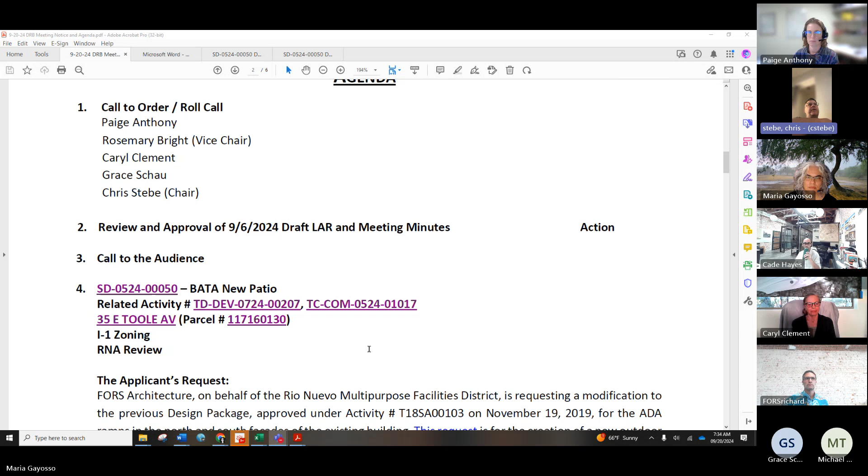Review and approval of last meeting. Get a motion on that. I think Caryl's trying to make a motion. You're on mute.

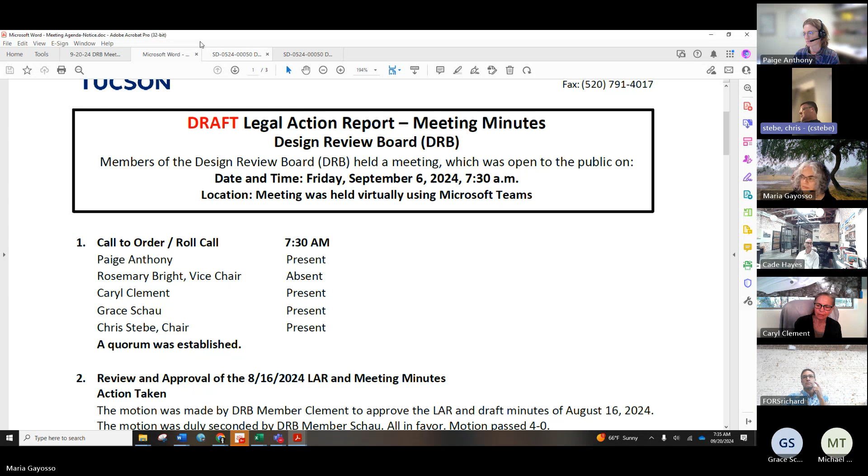Sorry, I would like to make a motion to approve the LAR and draft minutes of September 6th, 2024. I'll second that motion, seconded by Paige. All those in favor? Aye. Raise your hand. Aye. Any oppositions? Hearing none, Maria, sounds like we have that approved.

I'll do my normal call to the audience. Is there anyone on this call currently that isn't associated with the city, with this review, or depending on the agenda today, that would like to have a couple minutes to address the board? Hearing none, item number 4.

Let's get this case rolling. Do you have any staff summary? Yes, Mr. Chair, members of the DRB, this is the existing BATA restaurant on Toole Avenue in downtown, and they're coming back with the proposal of expanding their gross floor area to create a new outdoor service area. The applicant is here and we'll let him do the details.

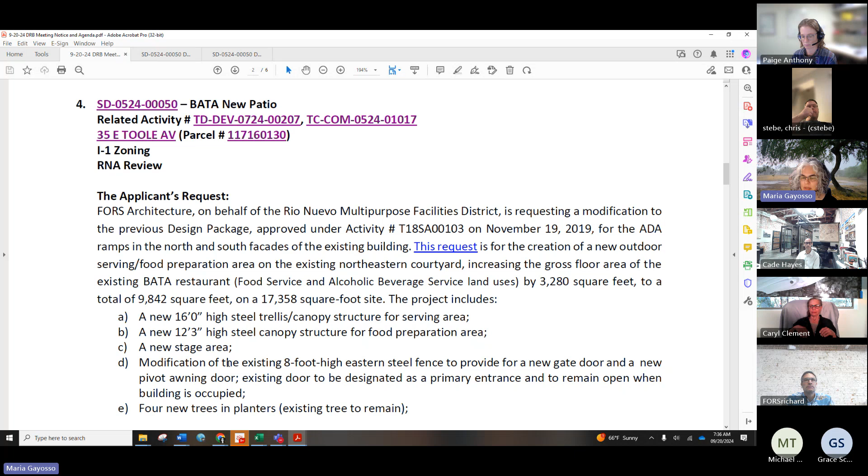I had come to the DRB back in 2019, I believe, for the installation of ADA ramps in the front facade on the southern side of the building and also in the rear on the northern side of the building. That was approved, so this is really a modification of the previously approved design package.

This project is a contributor. It contains a contributing structure to the Warehouse National Register Historic District, and these will be reviewed by the PRS. Usually it goes to the PRS first and then goes to you, but the PRS agendas have been so busy. We wanted to help the project move forward, that's why we brought it to the DRB first. And the PRS is going to review this project.

Actually, not next Thursday, they couldn't get quorum. It was just rescheduled to the 25th. That's correct, Michael? 24th. Okay, and that's Tuesday. Okay.

Also, I wanted to let you know the city of Tucson has lost their historic preservation officer, Jody Brown. She resigned. Oh wow, so quite suddenly. So together with Michael Taku and our supervisor Dan Bursuck, we've been taking over that section in the department, and with the help of consultants.

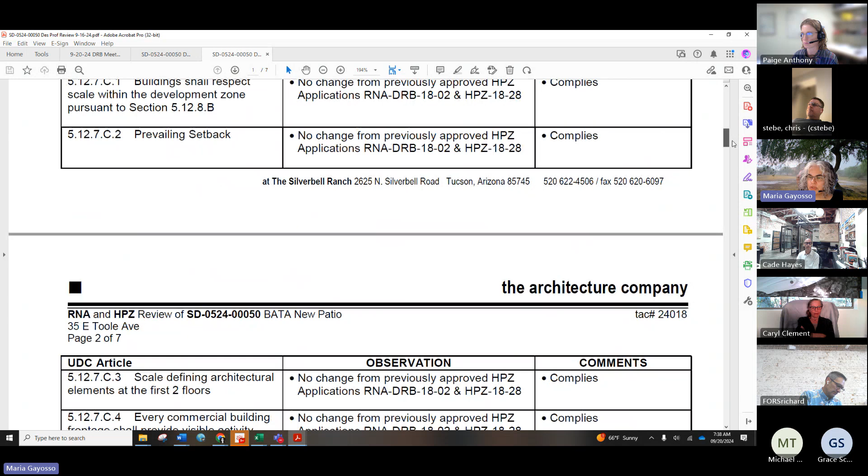So I did reach out to one of our design professionals, Richard Fetton, who provided some initial review for this project on behalf of the Historic Preservation Officer. He just had a couple of comments, and I'm going to share them with you because I just got his review as well, just for your benefit.

He was okay with everything. He was just asking to submit, for the applicant to submit details or cut sheets of all proposed lighting to confirm that all outdoor lighting complies with the RNA section in the UDC.

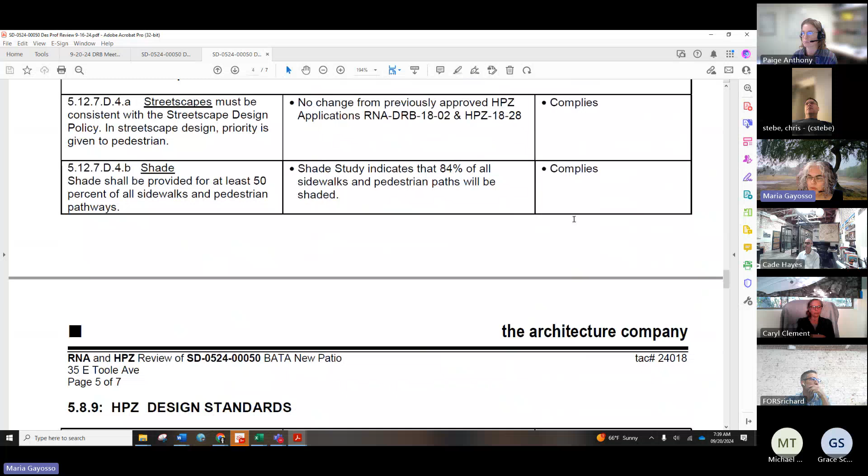The other comment that he had, let me go back to that. He wanted also details on the fence. Okay.

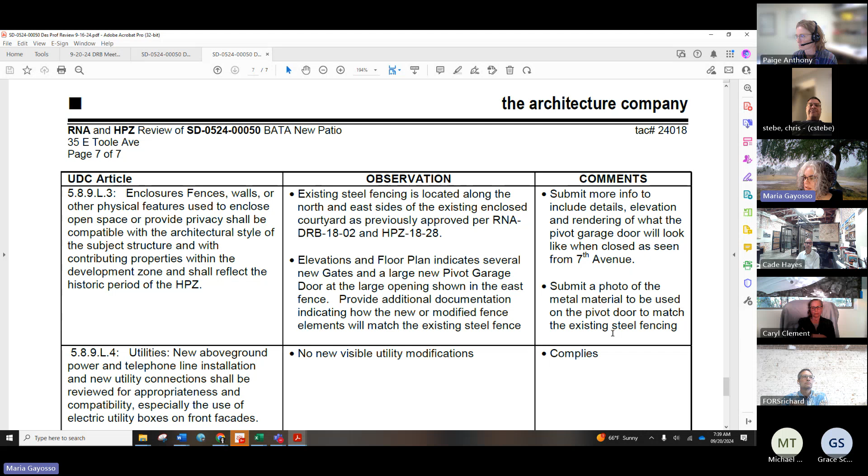He was requesting the applicant to include details, elevations, and renderings of what the pivot garage door will look like when closed, as seen from 7th Avenue. Submit a photo of the metal material to be used on the pivot door to match the existing steel fencing. And those were all his comments. Besides that, he was fine with everything else and is recommending also that the PDSD director approves the project. And that's all I have.

And I want to apologize to Richard with everything that's been happening in the office. I failed to send you the appointment on Microsoft Teams, and I'm glad you were able to see it and join in. Yeah, thanks, Maria.

I was waiting for it, and then I signed on yesterday. I'm looking, and then I had to double check when I saw 7:30. I was like, well, does she mean 7:30 p.m.? I've never had a DRB this early before. So I apologize also, everybody. I'm not a morning person, so if I stumble my way through this, I literally just woke up because I worked late last night. So I'll do my best. Maybe it'll go smoother, I'll be calmer.

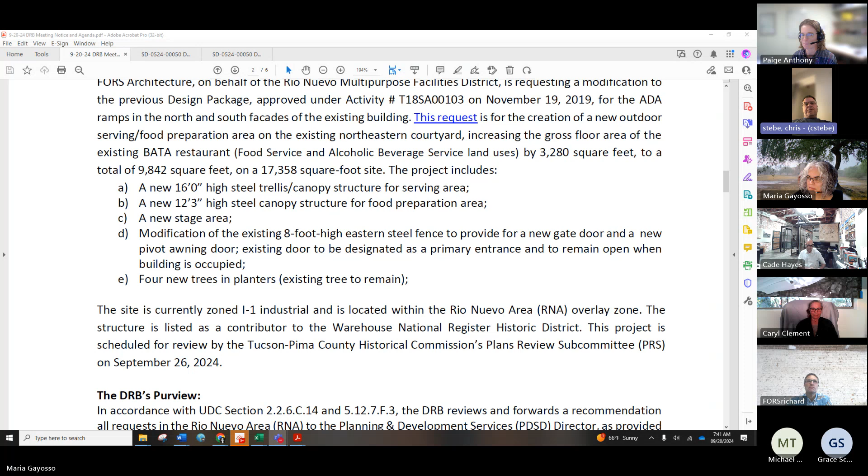Give us a quick overview of what you guys are doing over there. If you have any plans or elevations, we have a list of about 14 or 15 items that we're going to run through and see where you land on that. If you've looked at that list, you kind of know where we're going to be looking and what kind of things are under our purview. But give us a quick overview of what you guys are doing back there.

And sure, Richard, you can share your screen. Yes, please. Okay, I'm going to go ahead and share my screen with you guys.

Basically what I did is I just pulled out what I thought were the more relevant pages of the hard copy submittal, so I could give a little clarification. Maria already covered, stole some of my thunder on the historic stuff, so that's good, and I'll kind of gloss over that and go a little bit quicker. I'm going to go ahead and share my screen right now with you guys, and you should be seeing it.

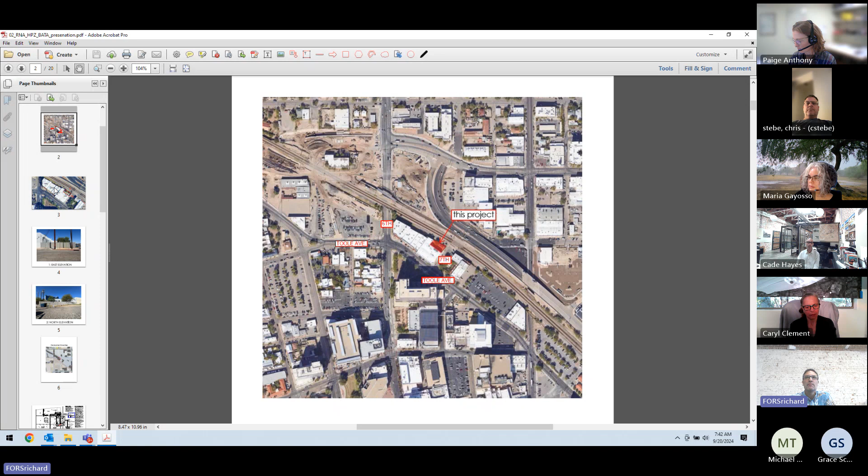This first slide is just a Google view of the larger context of the area, just to give some context. So we're looking at this block here. This is Toole Avenue that runs through here, 6th Avenue, 7th Avenue which has been discontinued, and just to the north is the Links project, 5th Avenue, and here's where the big dig is going on. We are in the back part of that. I'm going to zoom into this, a more recent street view.

The original one was from the presentation; this is a more recent one. So again, this is the existing Bata restaurant, kind of an L-shaped building. The restaurant is in this area, and this area in the back is where this project is taking place. There, I have it kind of demarked in red.

Right now it is just a steel-fenced-in utility yard that they use to put old chairs, banquettes, tables. It's just kind of a storage yard for them, really.

What we want to do - well, let me give you a little more context again: Toole, 7th, North Stone. These arrows that I have drawn on here are some exterior photos. The last time I tried to use Google Street View in one of these meetings it didn't go so well, so I went ahead and captured some photographs to depict the area.

So standing here looking toward the west, it basically looks like this: an 8-foot high steel, sort of extruded steel deck fence, kind of fading a little in paint. This is the Bata restaurant building you can see in the background for context. And if we were to stand out here on the railroad tracks looking toward the south, similar view, the same fence kind of wraps around and encloses this whole area.

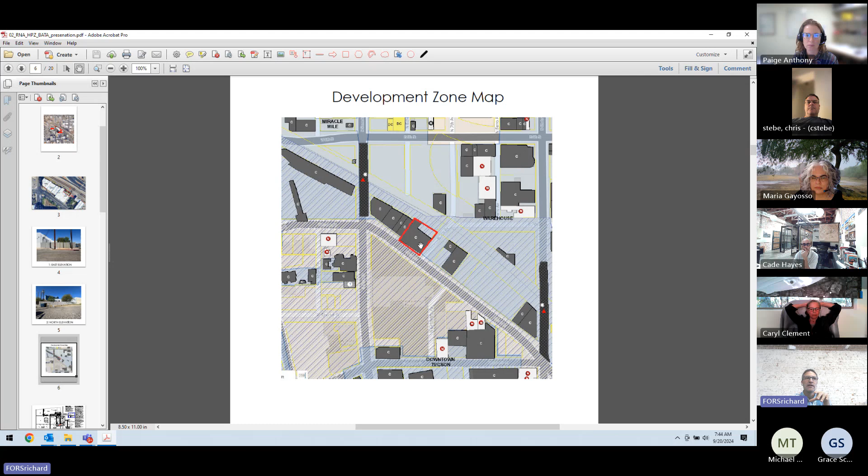Jumping down, quickly - this is the development zone map. As Maria mentioned, this is contributing. You can see our little slice to the back is technically, I guess, not historic, but the building is, and we're adjacent to the building. Also, as Maria mentioned, this is the previous 2019 RNA HPZ.

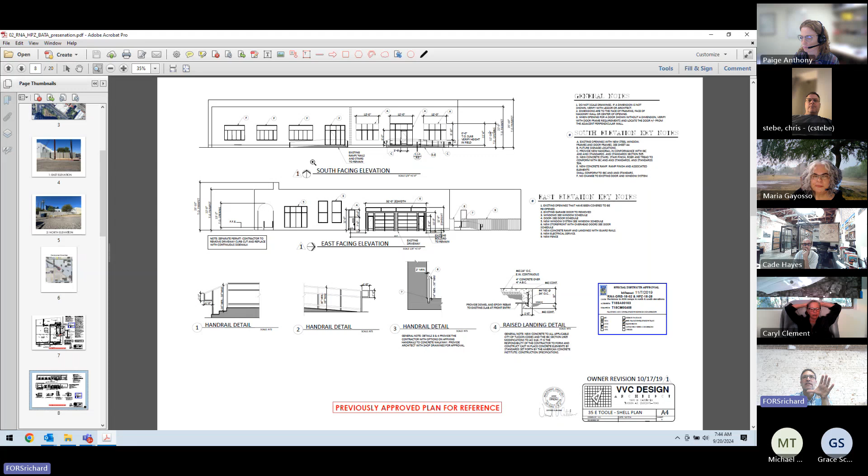That was primarily for - you can see there's some ramps out front, some ramps in the back. If I pan down to the elevations, there also was a little bit of work, Maria, that was included where they put these roll-up garage doors in, so technically the building was slightly modernized from its original historic appearance.

I'm going to zoom in again - this is the previously approved RNA. This area in the back, as Maria mentioned, was to put these handicap ramps in because the Bata restaurant is about 2.5 feet higher than the existing grade. So these ramps were put in to provide egress out of the space, and the rest of this area is just the utility yard.

So we want to activate the space as a part of the restaurant, turning it into what we're calling Bata Garden - it's kind of like a beer garden.

So we want to add 2 covered structures. This one in the front will actually be a solid steel deck that we want to have an outdoor grilling station, so we have some food service equipment out here. We want to have an outdoor bar. We want to have outdoor grilling. And then the rest of the space would be seating.

And you can see we have another structure in the back that would be like a trellis-type structure. Then we want to add plantings and tables and chairs, and again activate this space as a patio that would be serving the restaurant.

So I'm going to pull back out again now to the more site plan view of my drawing and zoom in here so that you can get a better idea. I wanted to show you graphically what those looked like, but then in plan again, this is our patio space.

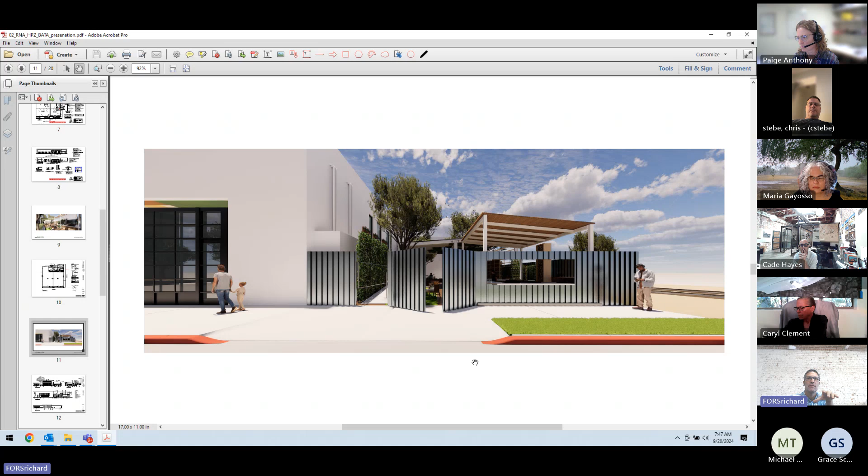And again, looking at this structure, I'm going to jump over next to a more static construction drawing, because part of the reason we're here for you guys is because of the concept that from the street, would you see the work that we're doing? And the answer is yes, right?

So looking at the construction drawing, here's the 8-foot fence. In the background here, you can see the back of the Bata building, which is at 20 feet tall. The fence is at 8 feet tall, and then you can see our structures. One of them tops out at 16, the other one at 12'-3". So the idea is that these structures are above the fence, below the existing building - we put them in there in what we thought was a nice setting, but yes, you will see them from the street.

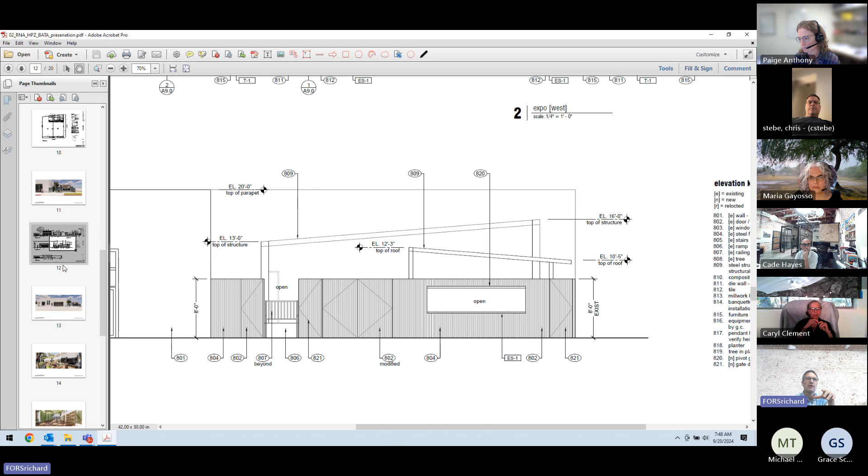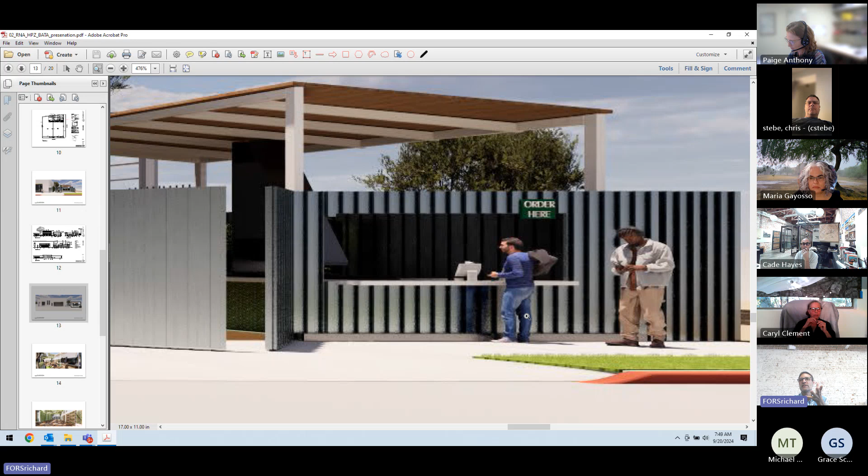And again, that's the primary reason that we're here for this DRB. Pulling back a little bit further from the rendering I showed you before, just a little more context - again, the building, the fence, and then you can start to see our structures into the back there. And then this idea over here that we need to elaborate on, that you could potentially order from the counter and kind of engage the street a little bit.

I'll skip back to the plan view. Here's our approach to landscaping. There's an existing large mesquite tree here that we want to keep, and then we want to add some trees of our own, smaller potted trees and some larger trees, just to create the feel you were looking at earlier. We have this existing mesquite, and these trees would be Chinese pistache. We have some vines and other things just to green this space up a little bit. You can see this in plan now. Here's the kitchen area we're talking about, with access to the street. We have a smoker in here and an outdoor pizza oven that would let us make the small outdoor menu they want to propose here.

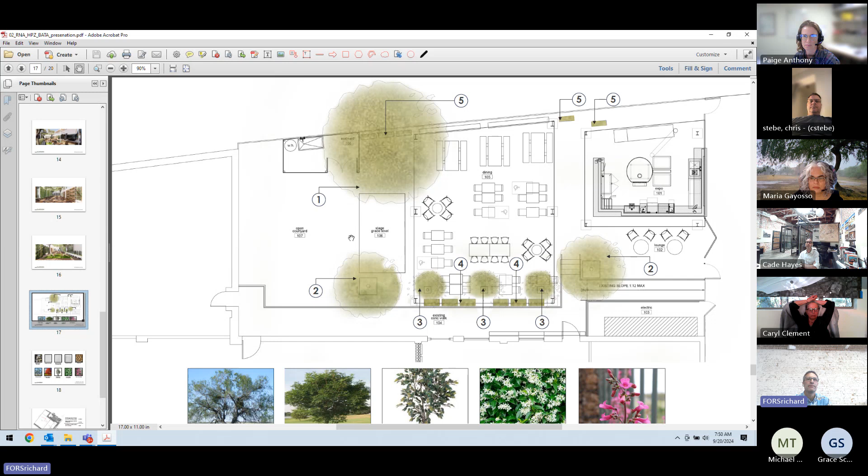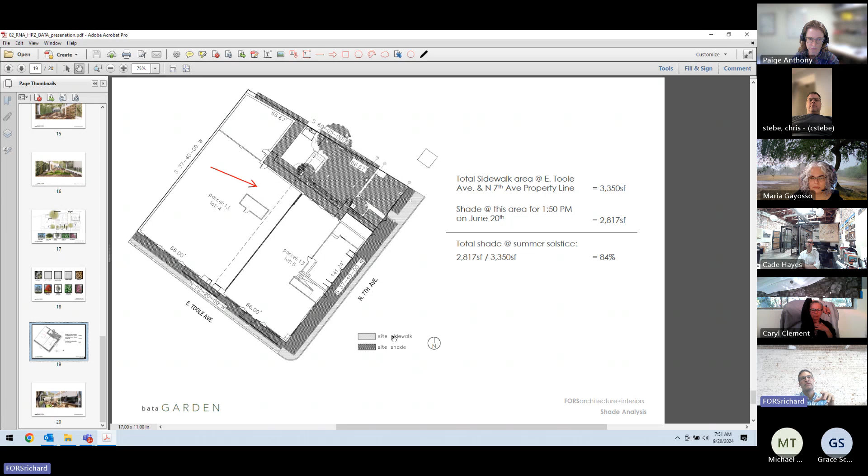Lastly, one of the items that's important to you guys is shade. This is a shade study at the highest sun time of the year, and most of this area is in shade. At the end of the day, all the trees, all the trellises, and the building create vastly, about 84% shade compared to the sidewalk.

So that's just a quick rundown of what we want to do, zooming back again to the money shot of what we want to sell here. Again, just reactivating this space as more of what we think this zone is asking for and what the restaurant wants. So I'm going to turn it over to some questions if you guys have any. I know I spoke a little fast, so hopefully not too fast.

How much espresso have you had this morning? That's just it, I have a 4-shot iced latte to wake me up. Thank you. See, I'd hate to have a presentation after you've had coffee.

Yeah, that was good. Paige, it sounds like you have something you want to jump into, so I'll let you guys have it. It was a good presentation there, Richard. You gave us, thank you. I think most of the info we want to go after in this review. So take it away, Paige.

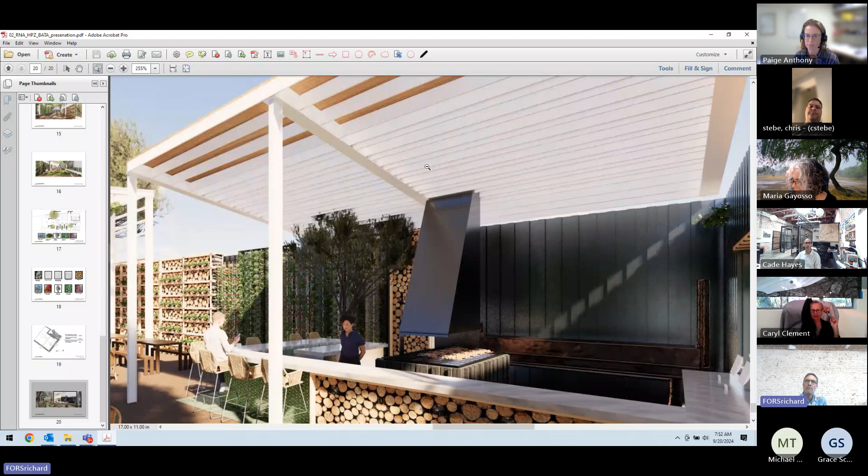I have some questions about the roof, the trellis and the roof. Is that going to be... I'm having a hard time telling. Is one of them going to be open and the other one solid? Exactly. So the area where you eat is meant to be more shade, and we want to grow this vine over it. The area where the kitchen is, is solid, and that's where I showed that metal deck. It's hard to see there, it looks like wood poking up, but it would be a metal deck. We needed this primarily to cover the kitchen area already.

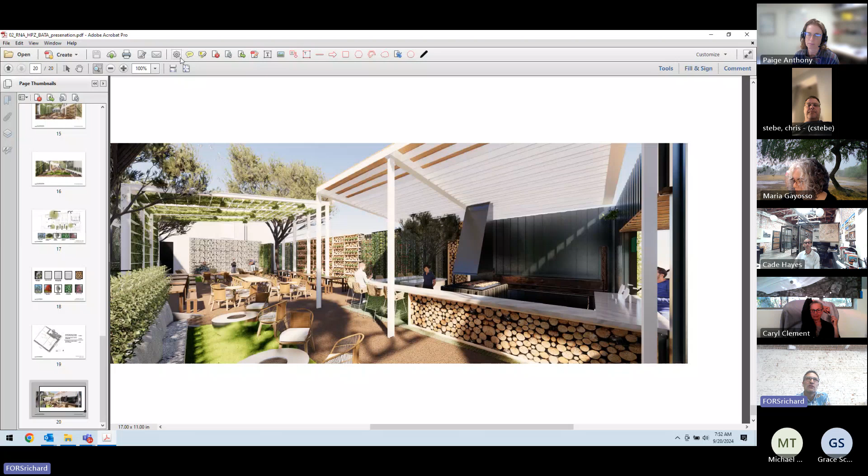To get this approved by the health department has taken a lot of negotiation to get them to allow us to cook outside, and we need to provide as much protection as we can.

I was wondering if you were aware that the Chinese pistache is not really a good container tree because the minimum size is really 25 by 20. As a landscape designer, I don't see how that tree is going to do well in a container in the long term, especially being rather close to the building. Was there a reason for the container versus an in-ground planting?

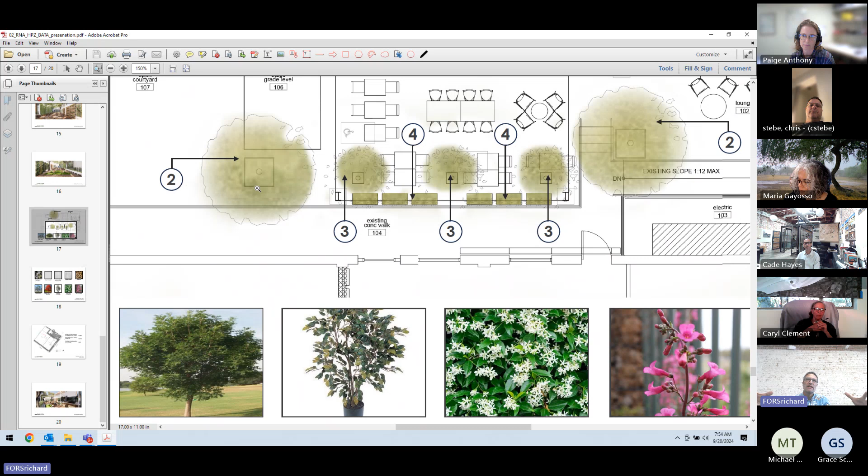I guess I'd say there were some smaller container trees, some smaller containers. These smaller ones were in a container, and these were what we kind of want to use, ficus trees. These are kind of small, we like the look of these. When I say these were in a container, these are actually going to be an in-ground tree with a planter box to just kind of build it up, but the idea is that it would be an in-ground tree.

This is just a tree we have used before. We recently did the Corbett's pickleball project, using this tree there to create a kind of bosque area, and we liked it for its largely evergreen properties, though it can get red in the fall a little bit. We put it here as a placeholder, but it's a good idea to reconsider since you're right, it is a little close to the building. This landscaping wasn't really regulatory, it was more for our own look, so we were just trying to choose what we thought would make the place look good, and we wouldn't be against pivoting. It's a good tip that we should look for something maybe more appropriate for scale, even if it is going to be in-ground.

So I'm going to make some notes about that.

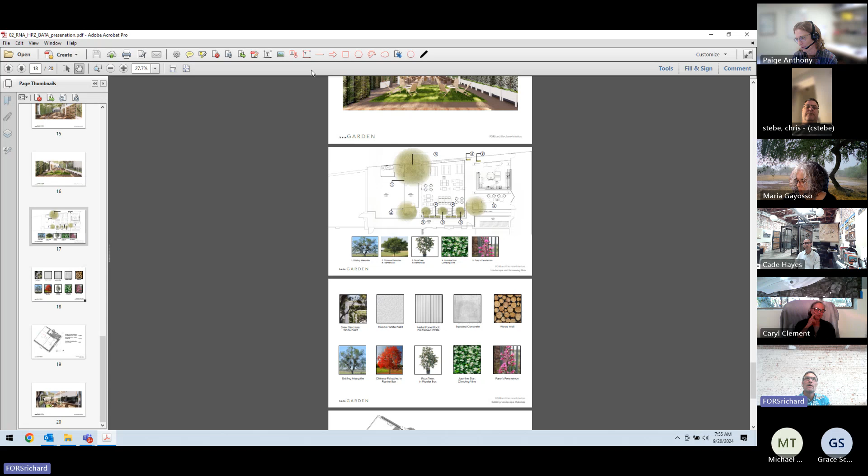How big are the planters? Right now they are 4 foot by 4 foot. The idea would be that it's a 4 by 4 foot planter where the bottom is open, so the roots could potentially go down. It's really just an enclosure because we wanted to get some kind of vertical effect, for the look of it, so that it didn't just look like a tree, it looked kind of like a curated approach.

We would be happy to put other types of plants in here. We have the mesquite back here, and there's a lot of mesquites and palo verde that gets used. We were just looking for something that was a little more dense green, so any suggestions we'd be happy to entertain.

The Texas olive might be more appropriate in size. I'm concerned, even though I'm not sure what the ground surfacing is in that area, but I understand the roots can go down - if they're not going to get water beyond the planter, it's not going to really help much. That's all I've got.

I know we have a list to go through, but let's see if anyone else has comments or questions.

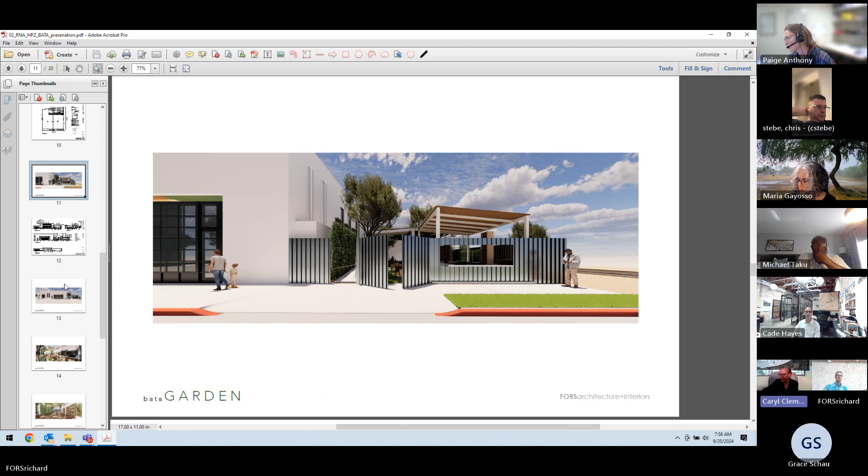Yes, okay, with access to the outdoor patio area, the handicap access would be through the gates, the folding doors, or whatever you call them. What is the handicap access into the outdoor area?

So what's happening right now is that there is accessible access. There's stairs, and then there's this access for egress, and also to get up into the rest of the restaurant. At this point, without building any more ramps, the idea is that we would be utilizing this existing ramp for accessible access into the building, as you proposed.

The idea was that while the business is operating, these doors in this area here - this is not such a great site diagram, I apologize because the property line is so strong - but the idea is that while the restaurant is open, these doors are open.

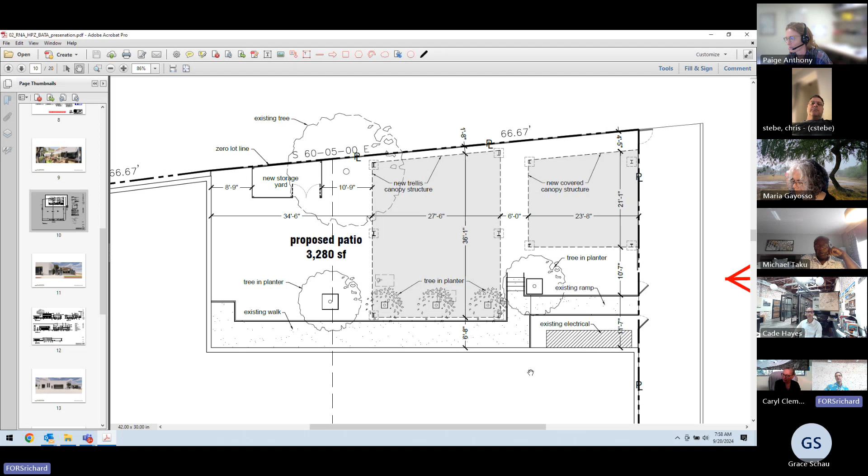So this whole area right here is completely open, and people would have to go out into the right of way and come back up and on. We just didn't really want to build any more ramping back here. The area is small, and it seemed like that was okay, so we proposed this during city review, and the building official was amenable to it.

That answers that question. My other question then is, when the doors are open into the patio area, are they going to impede traffic flow into the existing sidewalk area? You're talking about this area over here?

Yes. So when the doors are closed, part of the door has some smaller man doors that we needed for egress, and you can see one down here. The idea is that this door would operate with panic hardware, and then this one up to the north as well. They're not really showing up so well in the rendering, but it's kind of over in this area here. I'm just going to zoom over here again.

Yeah, these would all be panic doors, smaller doors that people would be able to egress the space from. To kind of go back to this plan, this was a little bit of the floor plan. Go back to this guy again.

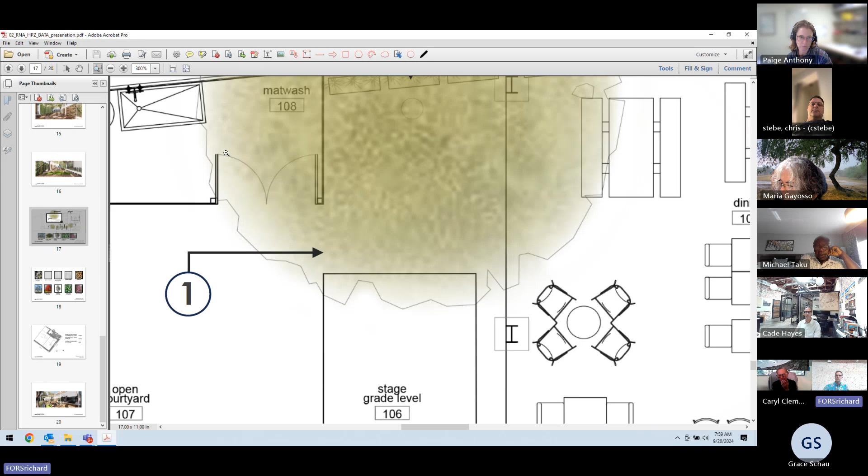In your presentation, I understood that those folding doors would be open all the time, but are they not? No, they are going to be closed for security at night- well, they're open all the time when the restaurant is in service. But at night, when they close it down, this door here would close to secure the place.

So when they're open, when the restaurant is open, will they impede the flow of traffic on the sidewalk? Yeah, so this is a little bit confusing. Right now this shows- if this door was open, I see what you're saying, this would end up being like this, and it would impose, unless it folds all the way back like this.

At this point in time, we definitely don't want this to be in. It's possible that they could swing in. The idea is that they fold all the way back, or they could be more diagrammatic. We show this as one big door, but in reality it's probably going to be smaller doors, and the idea is that we don't want to impede traffic.

No, this is also a really wide sidewalk. It's like 10 to 12 feet. So we think we've got the room, but yes, we don't want to impede the traffic regardless. That's the idea, that we would not impede the traffic. Okay, thank you.

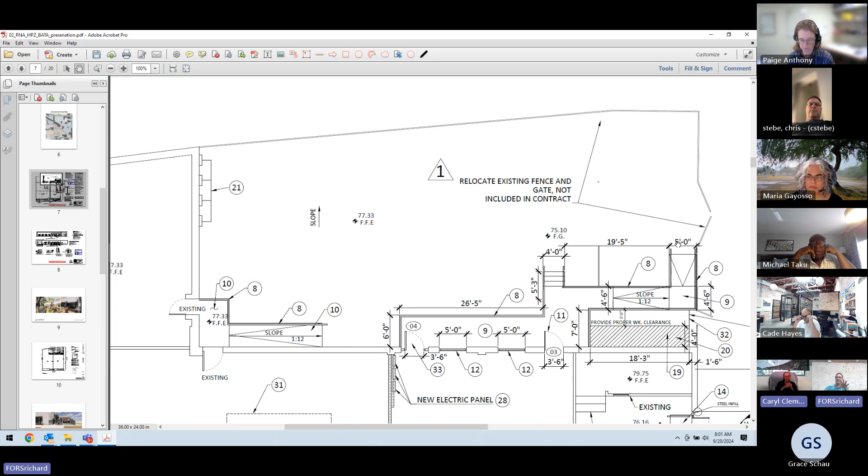Well, I touched really briefly upon that, but let me jump back to the approved one. This original approved drawing- there were a lot of liberties taken with the actual construction of this project. This project was built during COVID, and it does not match the existing plans that you guys have. You can see that the way the accessible ramps work is not what's there right now. It showed a kind of dogleg ramp, then discontinuous, and then another ramp down here. But what was actually constructed was what we're looking at in my drawing, where this is what it looks like.

This entire area is raised. There's a stair here and a ramp, a single ramp in this direction. This was what was actually constructed and approved somehow in the field, even though it doesn't match the drawing. So this is what you were really looking at.

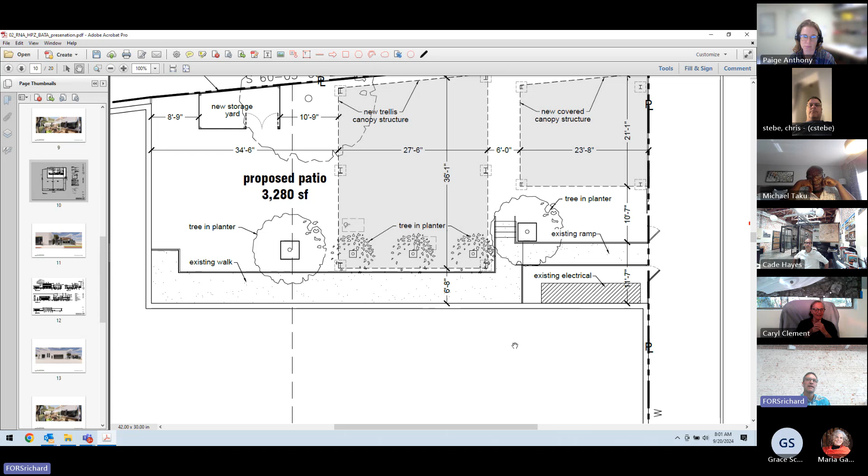Okay, and then the other item that I kind of lost in the renderings is the stage. Can you talk a little bit more about how that works? So the renderings were conceptual, and the idea would be that in this area here we could possibly have entertainment. This is just an open courtyard area that's meant to be a flex space that people could do whatever they want.

We don't really have a stage, per se, a raised stage or any kind of thing like that planned. But the idea is a lot of restaurants do have outdoor music. This isn't going to be any kind of an entertainment venue, but we wouldn't hate the idea that somebody with a guitar could maybe sing a few songs once in a while. This seems to have been a component of other outdoor areas that we've done, so we wanted to provide a provision that it could happen conceptually.

Okay, I guess the raisedness and how it correlates with the ramp and the existing walkway is kind of where I was going with that. So it's flat, not raised. Early on we had proposed it during the building review and so many accessible questions came up on how we had to ramp it and all kinds of things. So we just removed it because it was too much to have a permanent raised stage in there.

Sounds good. So then the other question, and maybe this goes back to the renderings being conceptual, but we have that existing, I think it's 8-foot fence along the north property line. How tall are those proposed planting elements on the inside? This looks like a green wall or something.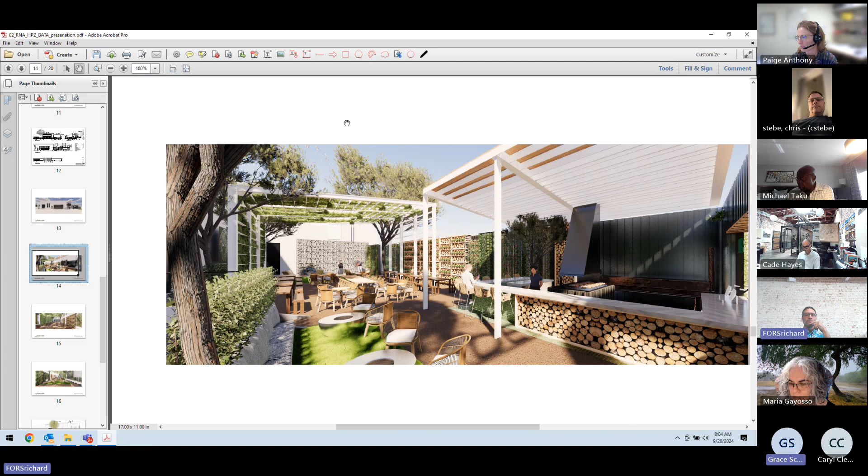But not higher than the fence, I should say. Yeah, gotcha, okay. Where are you guys in the process for review when it comes to Caryl's questions regarding the right of way and TRE or something that you may need to get there? So it has been a very exhaustive process that we've been running concurrent to this process to obtain the building department's review.

We've had four. We went through four building department reviews before obtaining final approval. And I'll just kind of cue you guys into some of the challenges.

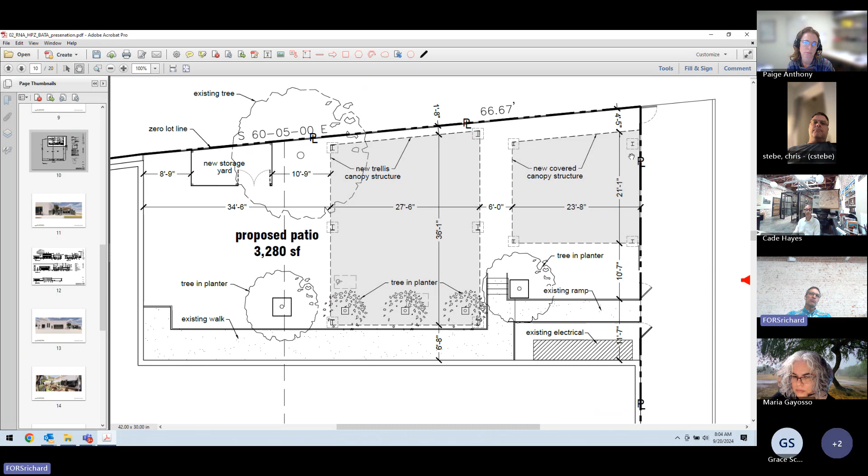So one of them was that these structures are right on the property line. Even though the rest of the building is indeed also on the property line with a zero setback on the intercity lot line, this new area would potentially be upheld to setbacks that we've had to work through with zoning, which ultimately becomes a part of this approval that you guys are looking at. Oftentimes these intercity projects would indeed enable us to build on the property line, so that's one of the things we've had to work through.

So at the end of the day, we've gone through those. Caryl mentioned exiting situations to maintain proper safety exiting and accessibility to the interior, again how to utilize this existing ramp. So we have building approval from a constructability standpoint. We've also had to submit a development plan because this was a change of use, which we didn't realize this yard wasn't the same use, but it wasn't. So we had a development plan that has gone through one review.

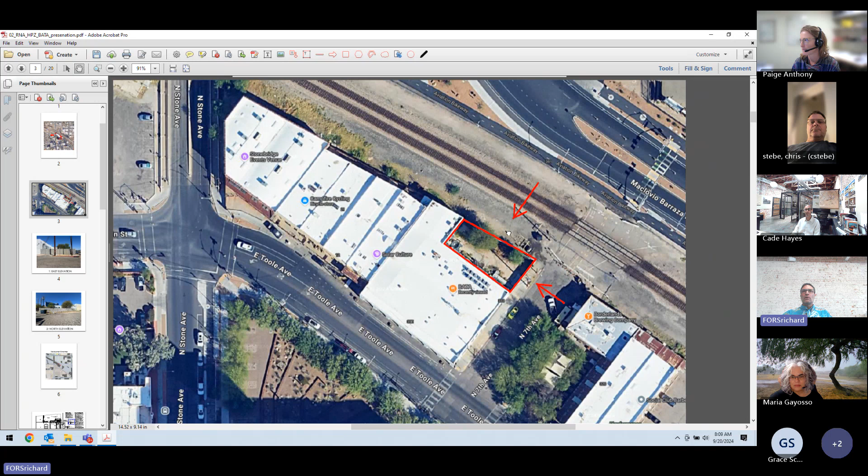I'm not sure if this is a question for you necessarily, but do you know - I believe they're making a connection to the aviation bikeway through there. Is that right? That's something I don't know. We worked on the Corbett's project, which was right across the street, and I had looked at this bikeway on both sides for a long time, but I don't really know what's happening here. You're saying you think there might be something across these railroad tracks to get us from here to there? Yeah, but don't quote me.

I'm not the expert, I heard that too, Grace, but I can't recall. It'd be nice though. From who? It was from me, Paige. Yes, you were the one.

When we were working on those Toole Avenue concepts, we got the Barraza Aviation final approved plans, and those show the vehicle traffic on 7th being terminated, with pedestrian and bike only crossing the tracks onto 7th Avenue - I can't remember if it's signalized, I think it's just pedestrian signals. So it's a small crossing, kind of like they have those ones in Flagstaff on the sidewalks. But we'll see how that actually develops if it ever gets built. Dealing with the railroads is usually a multi-year process. But yes, the plans I've seen that were approved for Barraza roadway improvements show that condition.

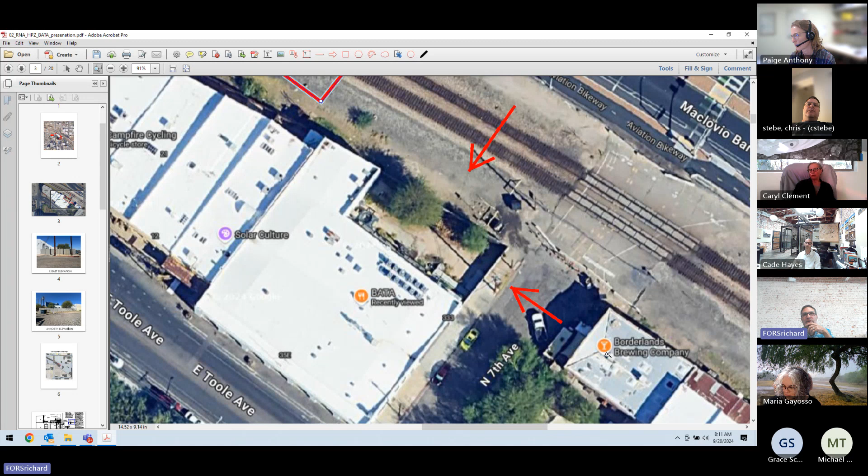I have a couple questions for you, Richard. Just to clarify, the existing fence and fencing material that currently encloses this courtyard are proposed to remain and just be modified and repainted, I heard you say? Yeah, that's the idea. You can kind of see a little bit here - the fence and its kind of massive shadow. At the end of the day, since it's already there, we were just trying to take it and repaint it, and by poking a hole in here and making this a little more accessible, we thought we could turn it into a part of our project.

So that was kind of what we wanted to do, right? Contextually, that area is going to remain very visually similar to what it is now, other than what's happening inside the fence. That's the intent, exactly.

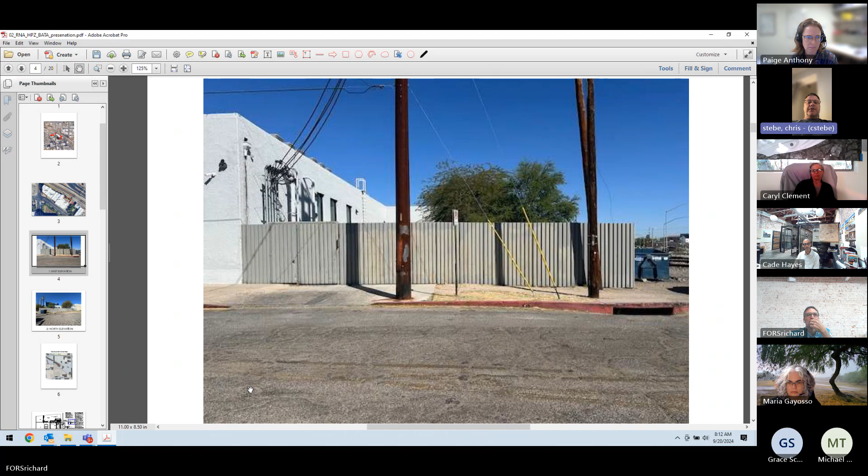Yes, and I think this view is good for the question Caryl was asking about the exit of your access ramp from the building, which terminates into the sidewalk. If you see that, Caryl, the sidewalk's paved all the way to the curb, there's no planting strip. But I have a concern, and this is a great angle for it: that ramp doesn't show a gate or any type of enclosure or closing device on it at all, in any of your renderings or drawings.

So I wonder about security on that, and what the plans are for that piece of the facade and this fencing. If you're on that ramp coming down, I'm concerned it terminates and doesn't terminate onto a flat landing per code. You would end up coming down this ramp and continuing down a driveway apron to the street. So has that been addressed by city code or city reviewers at all, like requiring curb and sidewalk modifications in this area?

Yeah, I don't have it handy for this presentation, but almost all the time we go into these projects, in my experience, the city asks us to close up abandoned aprons. This was not asked for on this project, but we've included it in our development plan to remove this apron, continue the curb here, and pour back so that this is a level landing. That would be part of our project.

In this street view, it looks like the sidewalk does not continue past here, and we don't right now have any call out to pour that back, but we could. We definitely want to mitigate this area here.

Well, you definitely have to pour out that sidewalk. You're providing a pedestrian walk-up window right in that zone that's dirt now, so I think you guys need to show some sort of surfacing to allow that pedestrian movement, and it needs to allow at least one spot that would be handicapped accessible for that exterior walk-up window, in my opinion.

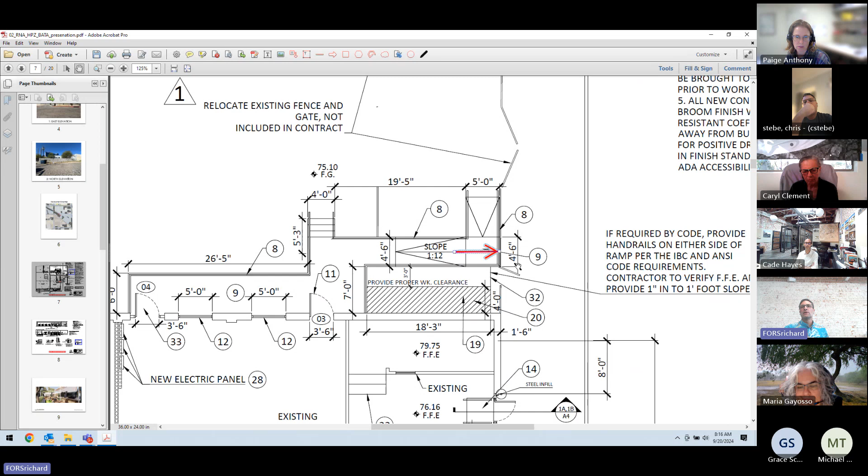So this was a problem that we had during the development review. The original approved plan works great, but because of the way they ended up terminating the ramp right here on the property line, we don't have a landing on our property. That ended up being a problem during building review because we need a landing here.

Aside from this being a level surface, there's no landing onto our property. So at this point in time, I'm going to jump back to this one, which is kind of the best floor plan that I have. At this point, we removed the door because we couldn't provide a landing.

So this was fully approved the way that it was. It's incorrect, right, by code. So we removed that from a security issue, and right now we need to solve this issue because we need to provide security for this place. We're looking at possibly a variance to allow the landing to be on the right of way from the building official. We don't have to, from a code perspective, provide security. We want to, and we need to.

At this point in time, we're talking about putting a door further in or something. We have not, there's not a good solution for that. This is a challenging site. So right now we've shown it as not being there, and we haven't really solved for that exactly, Chris.

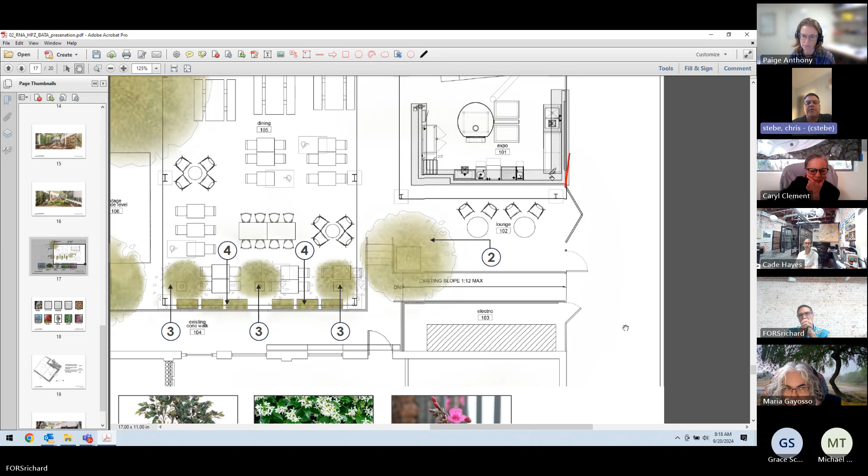Just from looking at tight sites, think of it like a bathroom, put a pocket door on that into the electrical area. Gosh, that's a great idea, actually. We had never even thought about it. Or you could use a double fold, fold it back once for the ramp and then twice to get into electric. Might be a good move for you guys. Yeah, no, I hadn't even thought about that. That's a great solution.

You most definitely need to secure that at that fence line. Just knowing the nighttime activity in this area, you guys are going to have all kinds of problems. I do appreciate the porosity you're trying to achieve in here, but you're gonna have some challenges, I think.

Caryl, did you have any additional comments? You had your hand up for a minute. Yes, I do. Backing up, I think I'm done with my stuff, so I think you can take it, Caryl, if you have anything additional.

Thank you, Chris. Backing up to Paige's concern about the species of the red push pistache. I agree with her, Chinese pistache, either one, sorry. I have thought of three species that are Sonoran Desert natives.

Acacia berlandieri, which is guajillo is the common name, Eysenhardtia orthocarpa, which is kidney wood, and the Lysiloma, what's the genus for Lysiloma, the fern tree? You guys help me out. Well, I thought of those trees. Watsoni? I'm going through my file cabinet in my head there, Caryl. I'll get there in a minute. Acacia berlandieri, Eysenhardtia orthocarpa, and Lysiloma, I can't remember, but it's the fern tree.

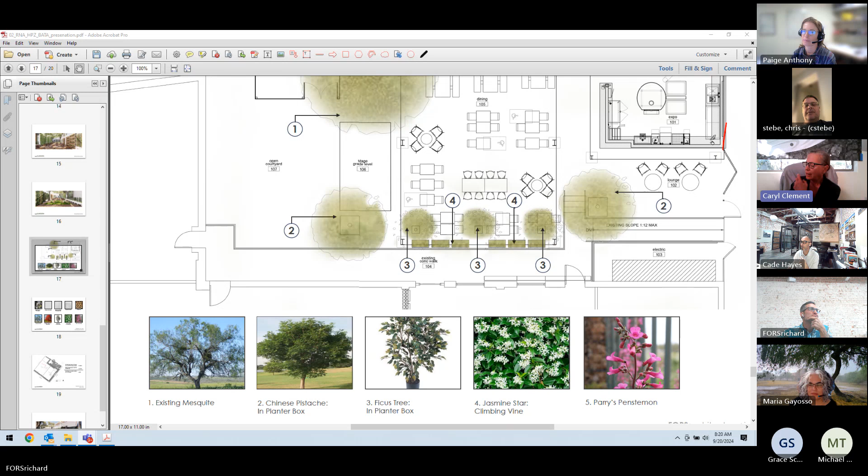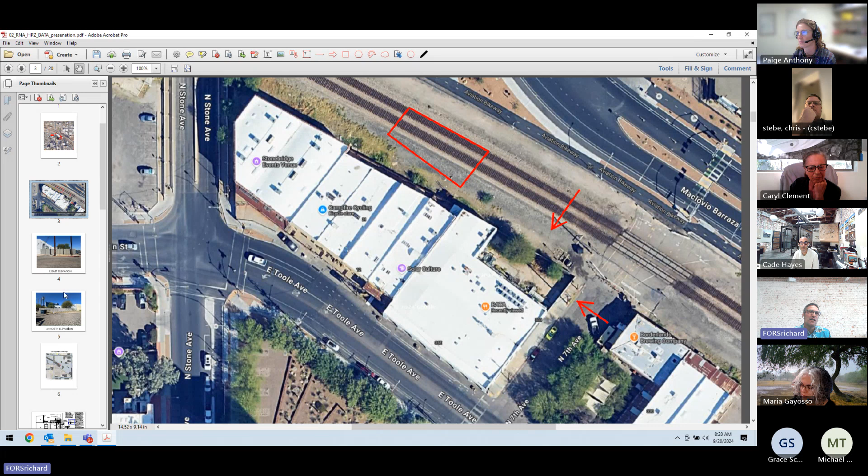Okay, thank you. Talking about the connection to the bike trail, do you have bike parking on your building? Yeah, I'm sorry, I should have stayed where I was. So I don't have the development plan sheet, this went in before the development plan, but we do have bike parking in the development plan.

What we've ended up doing is we have short-term bike parking that we've put in the back of the project just because we have area. And then we have long-term bike parking that's inside this area here via bike racks, for the employees. So we focused all the bike parking in this general area. This is a long way for a person to push a bike in, but it was the most open area that we have. Our development plan depicts the bike parking in these two areas.

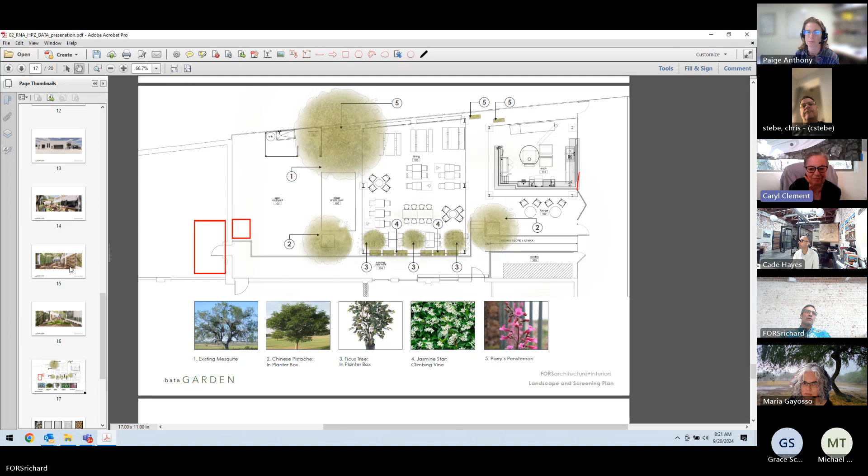Seems a long ways from the bike path. There was existing bike parking out in this area for the restaurant, though I don't remember exactly how much. There's a fair amount. We were required to provide bike parking for just this area, which was only 2 extra spaces, and there's like 4, 5, or 6 over here that we thought would handle the majority of the use for people coming to the restaurant in this area. We thought they'd largely use this area, which is right off the street and seemed like a natural place for biking, which was the original restaurant's provision in their development plan.

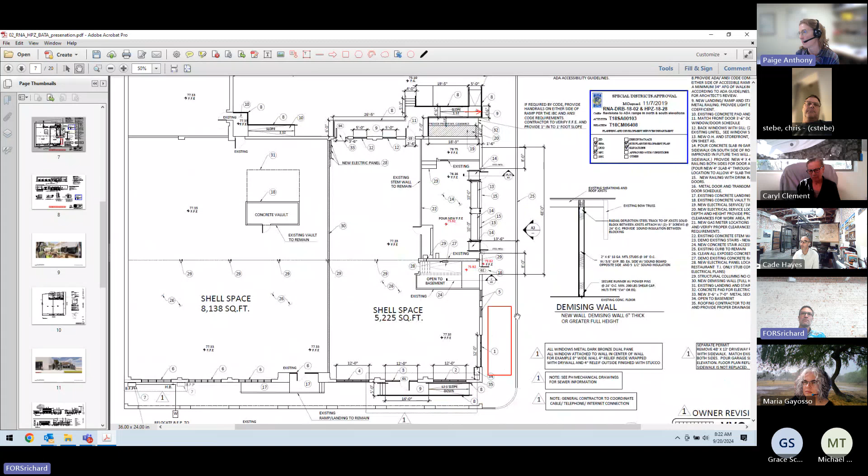I'm seeing 2 snazzy bike racks in this area on 7th. But this is a street view from '22, so I don't know if more have been installed since. There you go, yeah. That's technically 4 bike parking. You're right. So, welcome to business friendly Tucson.

But Caryl, do you have anything else? Oh, in your renderings, did I see hints of what would be a vegetative green wall along that same elevation that the firewood wall is on? What's happening there, or is that just part of a rendering that's no longer applicable?

Yes, we're trying to make a green wall. The idea would be, you can sort of see the fence peeking through here. Wait, you need to share your screen, please. Oh, I'm sorry, I don't see it. Thank you. My screen got lost. Maria stole your screen for a minute there, Richard.

Yeah, there we go. So the idea would be, you can see these show up in the plan, in our development plan, and in our planting plans, that we have a planter with vines that we're encouraging to grow up a mesh, and you can sort of see the fence peeking through here. These are just vines we have proposed on there, a couple of them. The idea is to try to make this as green as we can.

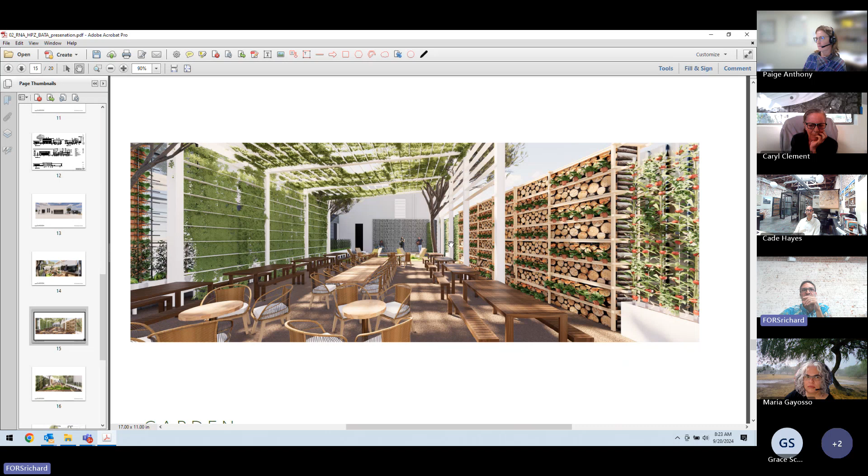Okay, good. Those are all my questions right now. Thank you.

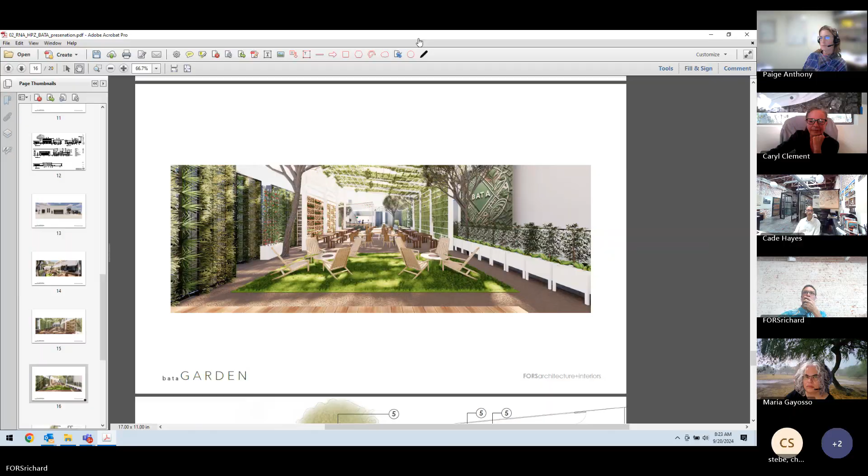Quick question for you about the different trees. I'm not terribly familiar with the 3 trees you guys mentioned. Any of those that would be the greenest and fullest of the ones you recommended? That was originally why we threw the pistache in there, because it was thick and green. I know what the acacia looks like, that can be a little bit sparse.

Of the other ones you recommended? Of the 3 I recommended, I would go with the kidney wood. It doesn't have thorns, which is a nice thing for close contact space, and it's pretty much evergreen depending on the coldness of the winter. Gotcha, no that's lovely. It's a lovely tree, little puffball flowers that attract butterflies.

That's exactly what we want. Yeah, I think there's a couple of trees that would fit that use there, Richard. I think Paige's comments were relevant, just from a health standpoint, and that pistache is going to be a slower grower for this size space you guys wanted to fill in.

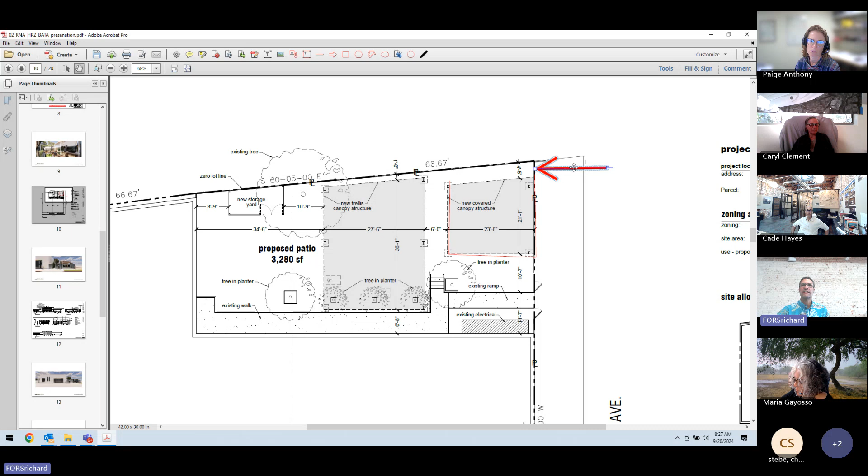But we also had to satisfy a certain illumination level for the health department. So we're walking a fine line to do that and also achieve the lighting level that we want. So in summary, most of your lighting is integrated into those structures. Exactly, integrated lighting, correct.

I don't know about the rest of you guys, do we need to run through all the points? I'm feeling like I haven't found much on this proposal that is contrary to items we typically review or have challenges with. And Mr. Chair, members of the DRB, we have our new DRB member present.

Oh, maybe we should go through them then, just for an education standpoint for the new guy. Oh, bro, you throw me under the bus. Oh, you're definitely making the motion. Let's see how many conditions we can add to the motion for him to remember.

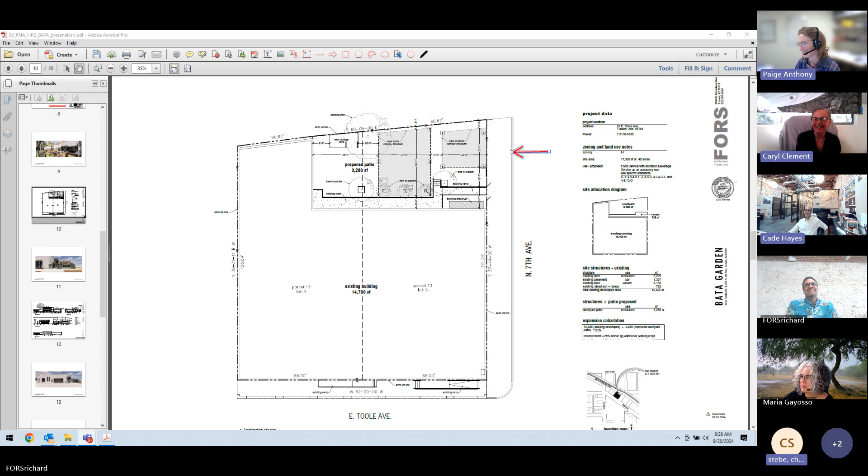Oh gosh, but yeah, let's run through those real quick. I'm running a little short on time. I may need to jump off here in a few minutes to do some family obligations, but I think we can run through these very quickly.

It's very odd to me that we're having to run through all this for a building addition as though we're looking at it as a new building. So a lot of this stuff isn't applicable. I spent a good amount of time reading it, and with you guys in my first review, but I didn't see any issues, and I think this is a good place for Tucson. And all of your questions were some of my questions, so I didn't really have anything to add there.

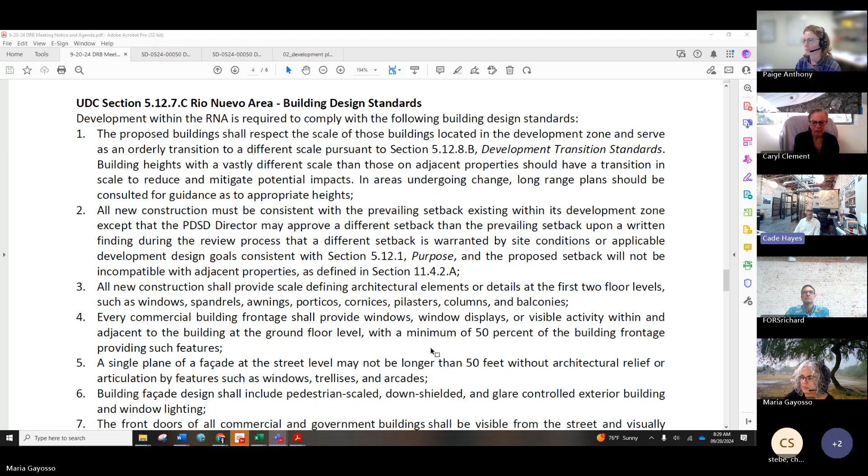Yeah, so I'm going to run through these. I'm following your lead. I'm going to run through these real quick, and when we get to the end, we may have a motion. But Caryl, did you have something?

I hear you. No, I'm concerned about the gate thing on 7th Avenue. That's my big concern. That whole area, it's messy in there.

So I'm going to run through these. On scale, this isn't a new building, and the scale, in my opinion, is sticking with the existing scale because the fencing is staying the same. I don't think the overhead structures are any bigger than the existing building. It's not new construction, number 3. In my opinion, unless anyone disagrees or has a point on any of these, please speak up.

Number 4, building frontage. That's really the storefront of this building, which this is the back of the house. And you're even still doing that, providing some sort of peekaboo windows into this space. So good for you for even thinking of doing that.

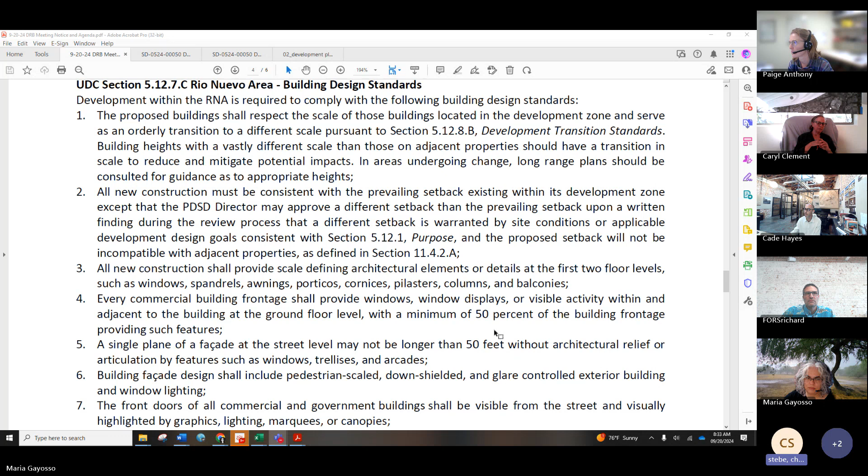I think we're good on number 2. Number 3, scale defining architectural elements and details: windows, doors. That's really for a walled structure, but I'm actually liking that those structures have a little bit of a tilt to them and that they oppose each other, that they're not the same, because everything in the area is kind of flat roofed — this creates a little bit of architectural fun in the back there and creates some interest.

And the window punch in that fence will be nice. That's going to be cool. Yeah, get my $14 taco.

I don't think we even meet 50 feet for the overall distance, but even then you have an articulation with that punch-out window. I think that would create enough articulation in that.

Pedestrian scaled, down shielded, glare controlled lighting — I think the exterior lighting on the actual building is security lighting. Does this feature exist in your lighting for this element? This is probably mostly interior.

I think we should add one condition to this, now that I'm thinking about lighting, because I asked that question earlier — if you're having that walk-up window, you're going to have to provide some lighting exterior to that space to light the ground and make sure you have the right amount of lighting in that space for security and to activate that space, so you may need to add one or two light fixtures at that pop window.

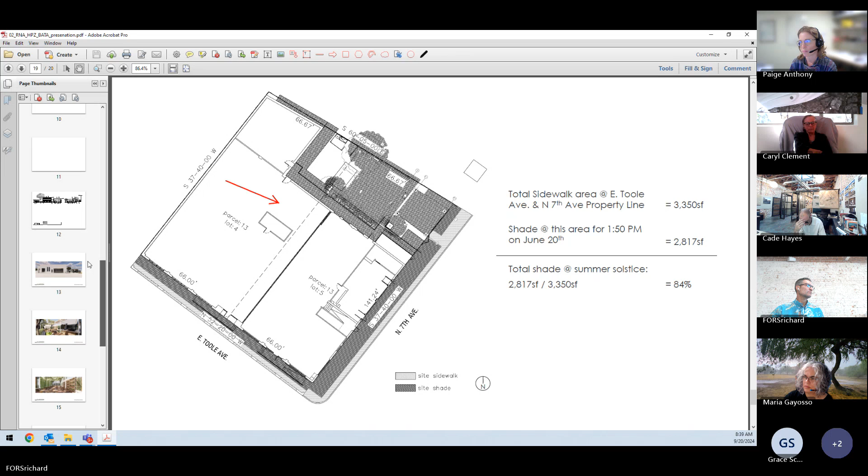I think Grace is right, it does say 50% of the building frontage. Oh, wouldn't that have already been addressed in the approved 2018 HPZ, since we're not doing anything to the outside of the building at all? If this was already approved, wouldn't that potentially be already looked at? Or maybe not?

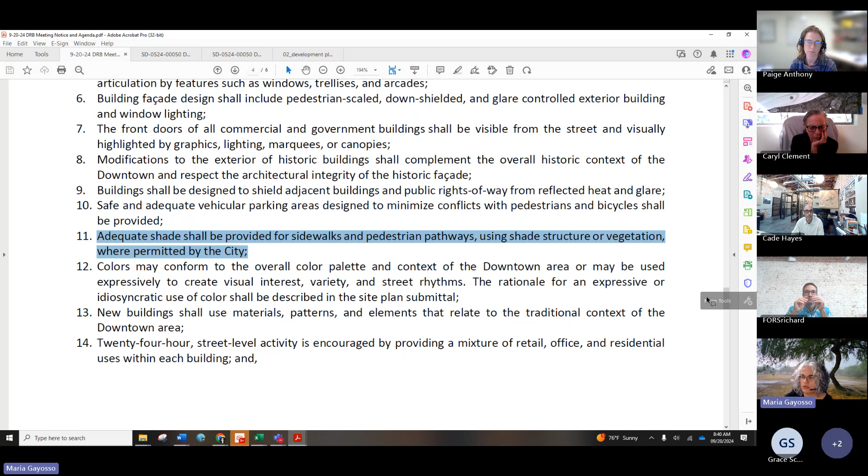Mr. Chair, Ms. Shaw, members of the DRB, the UDC calls for shade—let me share my screen. So there are two sections. One says adequate shade shall be provided for sidewalks and pedestrian pathways using shade structures or vegetation where permitted by the city. That's one section of the code, and then there's the section that talks about the specific percentage.

Richard, the code was amended a couple of years ago to modify this—so instead of 2 p.m., now it's 12 p.m. on June 21st. And it says 50% of all sidewalks and pedestrian pathways. So it's not just the sidewalks along the right of way, it's also any other pedestrian pathways that may be provided within the project.

Oh, okay. Thank you, Maria. Mm-hmm. Yeah.

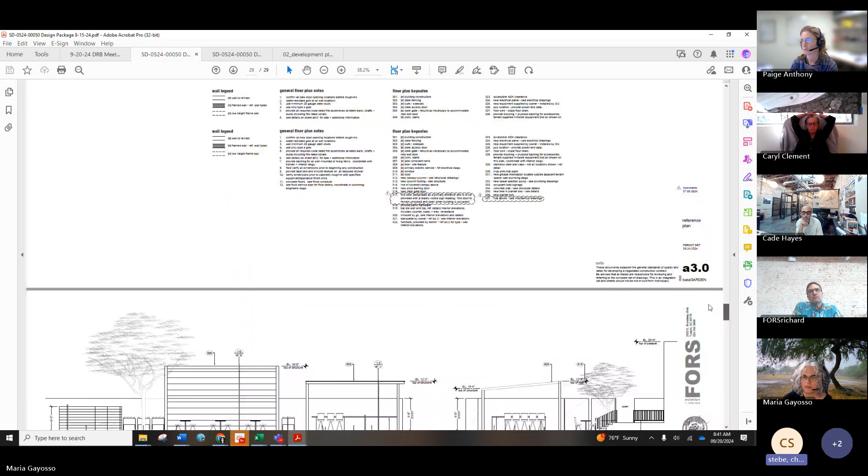And I'd say if your graphic is 1:50 versus noon on that time of year, it's probably a very marginal difference in a modeling study, in my opinion. Visually, I'd say that 50% of that sidewalk on the south and east sides, even if we were just going to isolate to the pedestrian right of way, is easily 50% covered in shade.

And I might lean into the intent that the majority of the space is covered by mechanical shade, that they're providing additional shade to this use area that isn't currently provided. That's a win in my book for our overall shade and climate goals.

No, I totally agree, and I think this activation is great too. I just want to make sure we're applying the code evenly to all the projects. Correct. So, Mr. Chair, members of the DRB, I will be requesting the applicant to revise this shade study and make sure the shade shown is provided for 12 p.m., and that it meets the 50%. Okay.

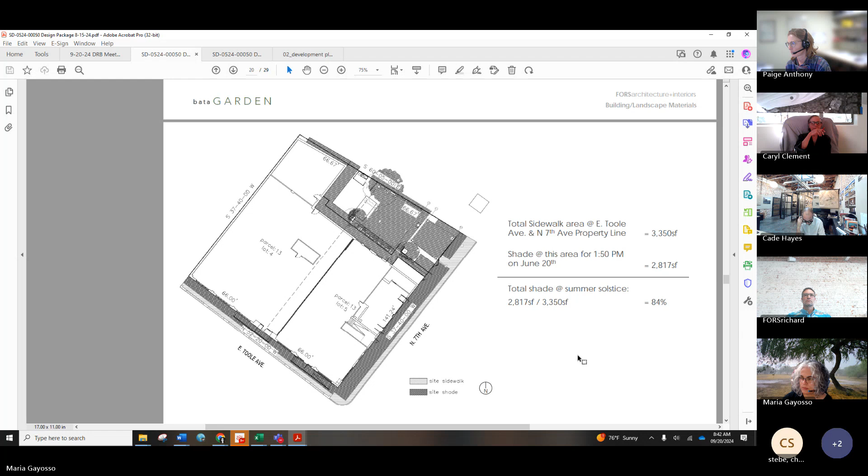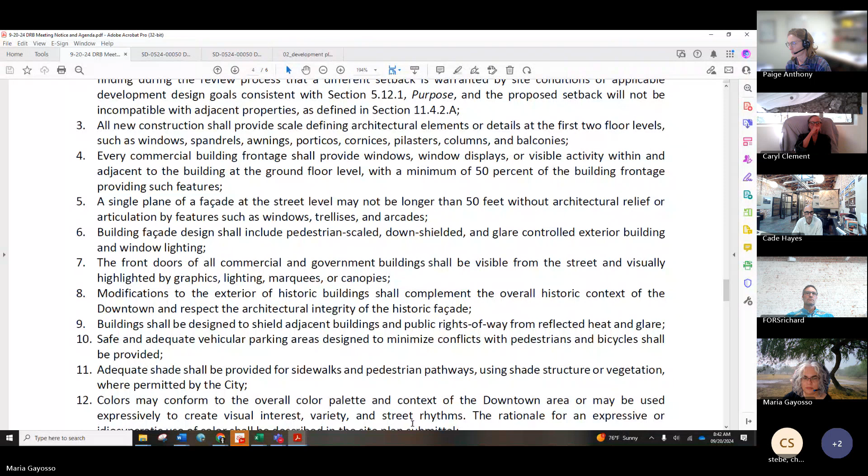Let's see what else we got here. Where are we going to put that—east elevation, resolving the ramp end and the folding doors impeding the sidewalk? Does that come into number 10, maybe? Sort of, I don't know where that would really fit in our criteria. Conflicts with pedestrians and bicycles?

Mr. Chairman, Ms. Clement, members of the DRB, I just want to make sure that before we jump to item 10, the DRB is comfortable. I don't think the DRB has gone through these other items, 7 through 9.

Yeah, it's Maria. I'm gonna get the front door.

Okay, some of these things we have to review for projects like this are not necessarily applicable the way they're written, and this back patio is being considered a separate project than the building itself. It's difficult, in my opinion, to look at some of these and say, well, vehicular access—we're just doing a back patio, does it really require additional parking? Does the modification to the front door apply—well, this isn't the front door, this is a back access patio, really an exit access. Some of these things are difficult for us to dial in on.

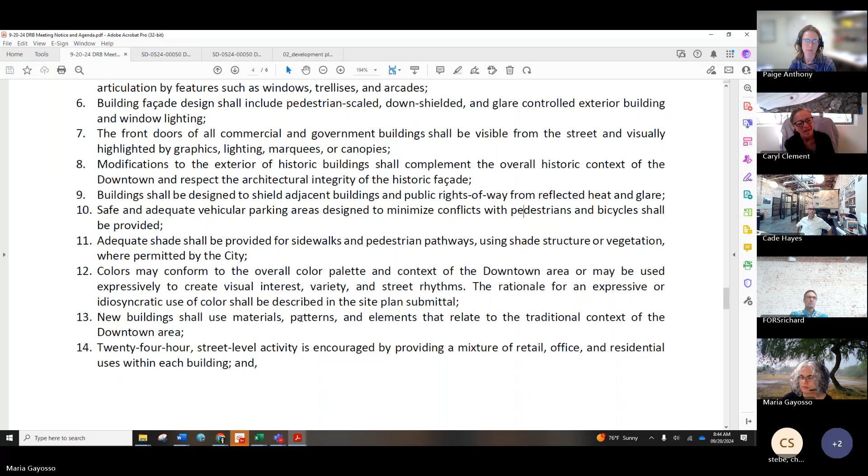I'm inclined to say they're not applicable to this case, and that they're making their effort, and that this is already an approved structure. I mean, it's an operating restaurant.

Since you guys were going one by one, I just wanted to make sure all DRB members were aware of those points. We've had this come up on a couple different cases, so if I feel like I'm blazing past one, it's usually from that context where it may be difficult to say it's even applicable to this project.

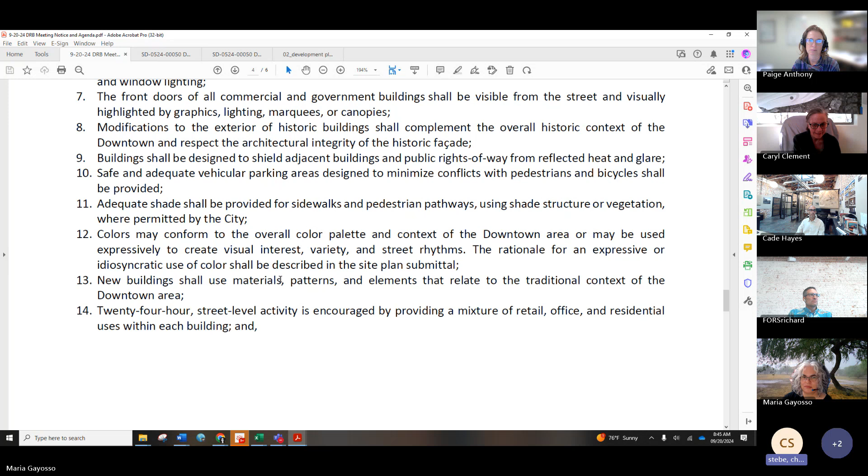Since we're going through them, we did vehicular parking areas minimize. Well, there's parking, adjacent street parking, and existing bike parking. There's actually additional bike parking inside for employees for long-term parking, which is kind of cool.

We went over shade, which Maria's going to ask them to resubmit, or to make a modification on their final development plan submittal.

The colors are holding with the white, with the existing fence remaining. There's no bright fuchsia going on here—no fluorescent green.

New buildings shall use materials and patterns and elements that relate to the traditional context of the downtown area. I guess we're considering those ramadas new buildings or new structures. This structure, in my review, is pretty contemporary looking, but from the shapes and forms it's clean lined, doesn't have a lot of articulation, so the clean lines kind of fit in that realm.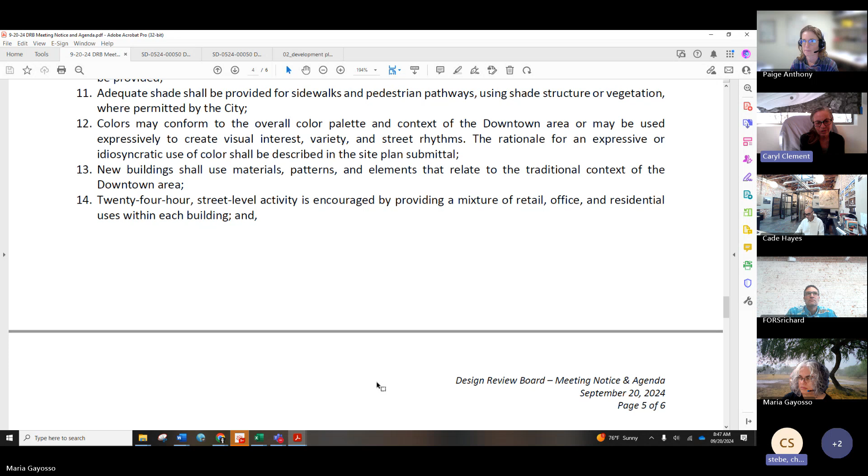I think you guys do need to do some work on making sure there's lighting on that sidewalk outside, especially if that handicap ramp comes down and has to egress out and then come back in. You need to have that space lit, and then the walk-up counter. So I think I'd be okay with approving all this if we make it a condition or provision that they provide some sort of exterior lighting to that sidewalk area.

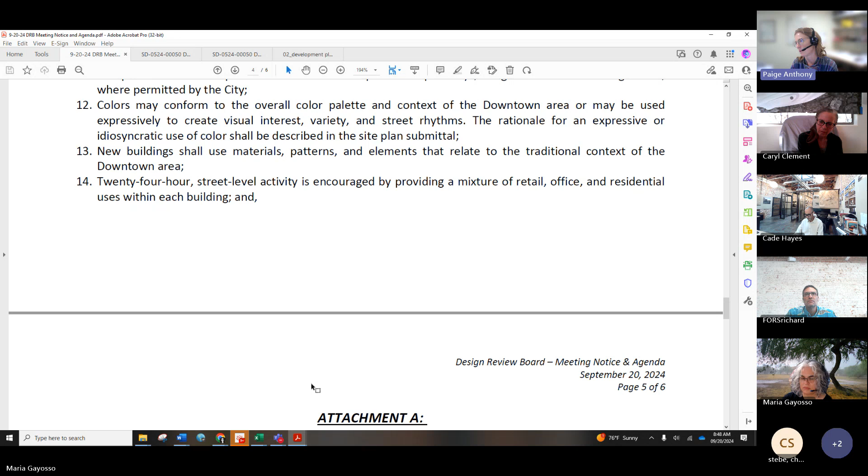I'm not disagreeing with you, Chris, but I did want to note there is a light attached to a pole kind of at the end of the right of way there—a City of Tucson light. So there is some area lighting already for the general street, which I think is helpful.

That light is over the street, so that's going to be good for vehicular, pedestrian, and bike safety, but I do agree that additional lighting at that window would be helpful. I think the thing that's needed is pedestrian-scaled lighting. Right, so that light we're looking at is not pedestrian scaled, and it's not maintained by this entity—you'd be dependent on the city to make sure that bulb stays operational.

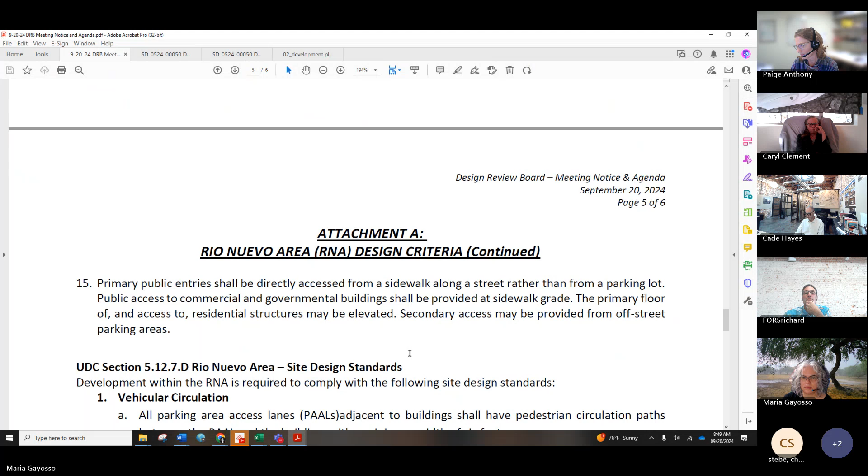I don't know how that goes. Here's your one there, Caryl, number 15. Oh yeah, okay, thank you. So number 15 needs a comment from us too.

Making sure that doors and, if any alterations to that existing sidewalk outside are made, that it remains 100% universally accessible. Right, and resolution of the ramp end so it doesn't dump onto the right of way, which is a sloped sidewalk, and the folding doors impeding sidewalk—there needs to be a clearer resolution of what the folding doors really will do so that they fold back and not impede circulation.

Or that there's adequate additional paving provided, even if they do impede that first few feet, so that there's definitely a universally accessible space there that doesn't impede flow of traffic, right? Chris, I think it needs to go further than that, because when you look at the pictures, there's telephone poles, guy wires coming down, signage posts. It gets messy in there, a lot of stuff going on in a small space. I think there should be a request for full fold back, or however we want to word it, so that it's not something that's allowed to stick out.

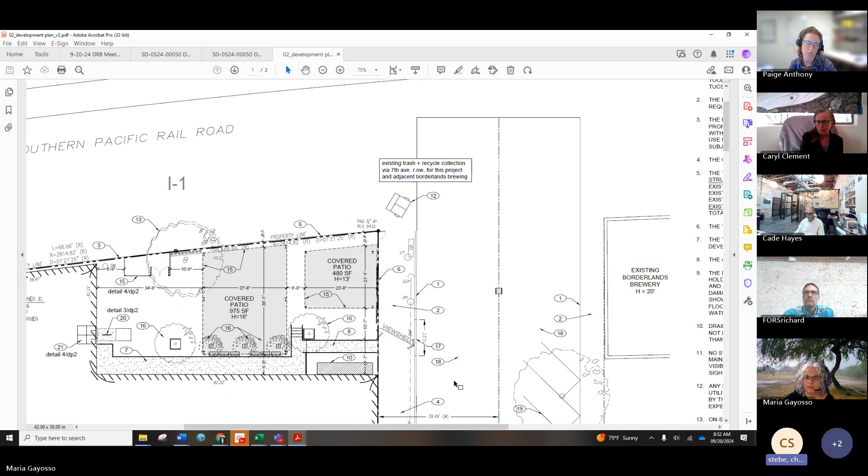That's fine, 6 feet is good for me, but I'm wondering—I would like to see the 6 feet with all the signage and telephone poles in place shown. I think, Caryl, the plan we're looking at as part of this presentation isn't their formal development plan being presented to the city for zoning review. I think this definitely needs to be a comment or condition we add, that the verification of exterior conditions within the right of way make sure that universally accessible path of 6 feet is maintained. It's not shown on ours.

I do entertain—is this something you guys are, Caryl, stuck on enough that you want to see that plan brought back? I'm sitting on the fence on it. It seems like a tight area, and the fact that their ramp dumps into the right of way—I understand they're going to raise the curb so it's not a sloped area, but I don't know, it seems like an area that's tight, unresolved, and needs further thought.

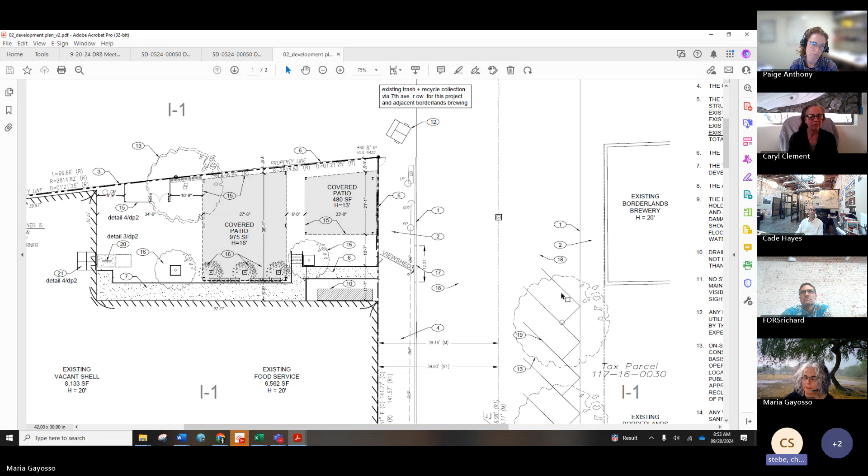Yeah, it is tight, and it could become—I don't know. Because this drawing we're looking at looks like it's probably from your DP. It has all the doors closed, right? So it's a closed door condition. In an open door condition, that's different than a closed door condition. Nor does it have the little signs. I think it shows the big two telephone poles, but it doesn't have all the little signs in there—the no parking sign or whatever.

Right, whatever it is. We're happy to provide this, but I think it's going to be very easy to get 6 feet out of this. This thing is like 12 feet—really, we're happy to provide whatever you guys need. I don't have a dimension on this drawing, but you can see the apron is 12 feet wide, just for reference. So it's 12.22 feet, so yeah, I can have 6 feet worth of obstructions and maintain 6 feet. That seems pretty doable. I can show a nice little path carving through there, and I can make the doors fold back. We can do whatever you guys need.

I'm fine with that, I think it's achievable. You're losing like 2 feet, maybe at the most, on those poles, right? Off the face of curb you probably get about 2 to 2.5 feet, maybe 3 feet to the outside of the pole at most. I'm pretty comfortable with this space. It's tight, but I think, Richard, in my opinion, your point's taken.

I think there's room to play in here. Caryl, I think a comment or a condition on ours might be appropriate at this time, instead of bringing them back. I'm okay with that. I think then put it on zoning to make sure it passes on the DP. So for my edification, it would be shown on the final set of approved plans that the signs are there and the doors are such that there is a 6 foot clear universal access through there, correct? Will that be shown somewhere? I would think that would be a condition we could add, that is shown on the development plan.

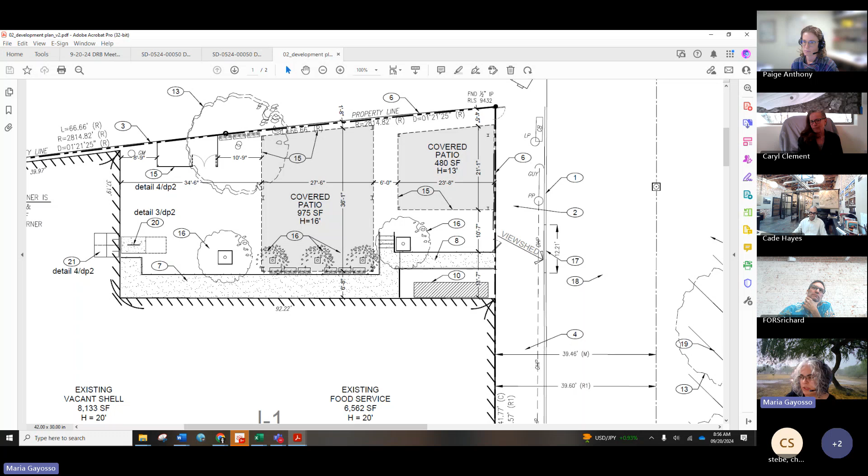Correct, yeah, that's the condition we're looking to have added to the plans. That sounds good to me. Even before I take it to the PDSD director for her decision, I will be asking the applicant to demonstrate that on the plans. So Hayes, you're writing this stuff down, right? Because you're going to make the motion.

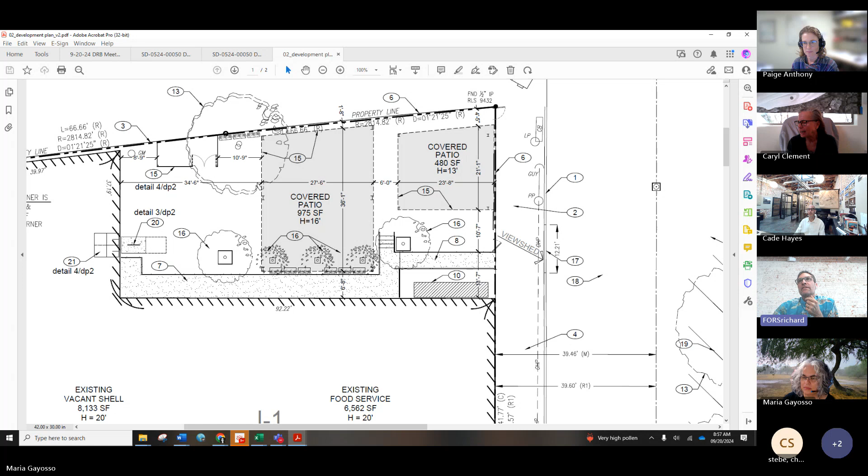Are we going to specify what was discussed earlier, that the curb and driveway is going to basically be altered so it's level across there? I think that's what keynote 17 is. Yeah, I think it's already on the development plan to do that. Okay, and it just wasn't on the graphic plans we were looking at. That was kind of a development plan light. Yeah, well, that's okay.

So confusing. These are the first comments from the development plan that are required for this submittal, but since then I'm already on my third development plan submittal, and these comments came back and were addressed, and you guys weren't privy to that drawing. Typically the 6 foot on the sidewalk is also part of the general regulatory code review. That's a comment I would get on every development plan I work on. You guys are just stipulating more clarification to it, but it's also a requirement that the zoning reviewer has to ensure the 6 foot right of way as part of their review. You guys just need clarity with the doors open, and I'll provide that. Yes, please, thank you.

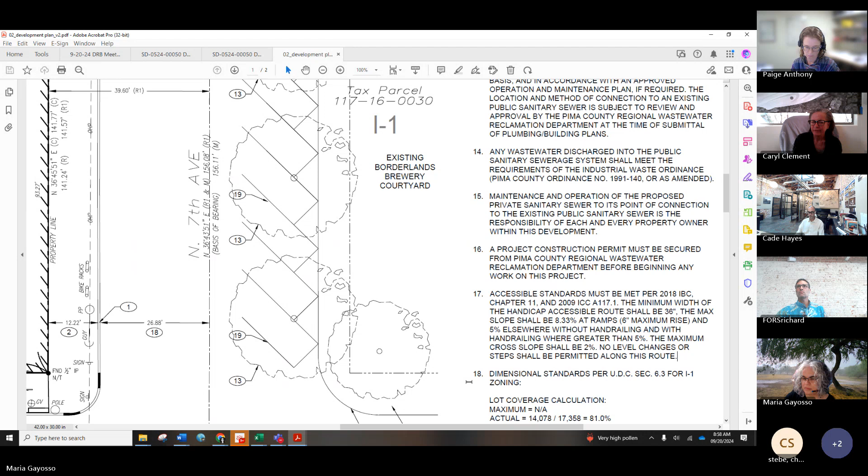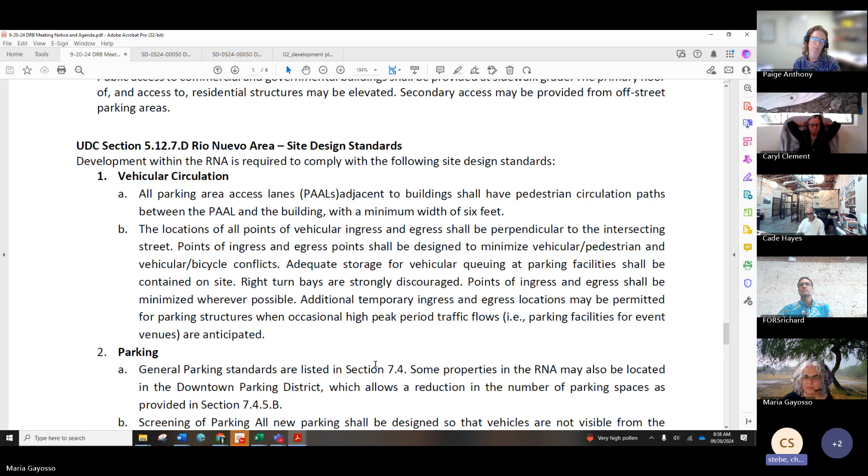All right, so 1B, we don't really have street parking, or you have street parking in general. Looks like you guys went through, you're not providing any new parking other than bike parking, and you provided 2 additional bike parking spaces? Correct. All right.

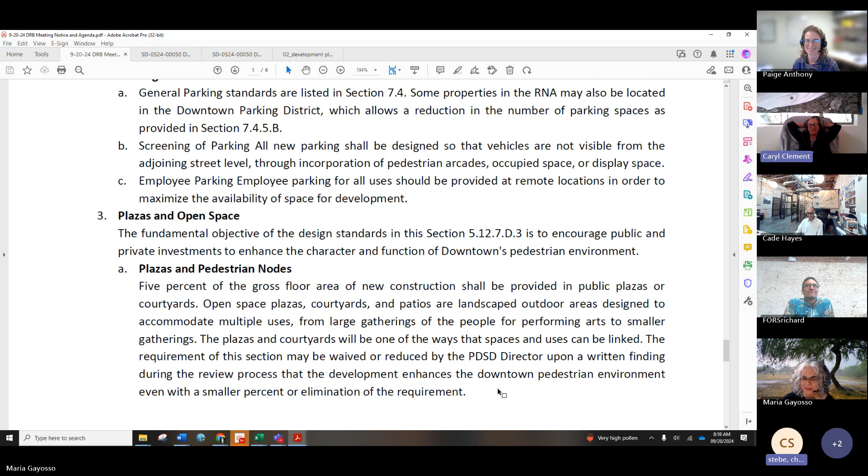We have the 5%, looks like for sure 5%, right? I think this is 100% open space plaza. That's right, it's a separate thing. Yeah, I keep forgetting this is separate than the building itself. We're 100%. Yeah, right, okay, thank you.

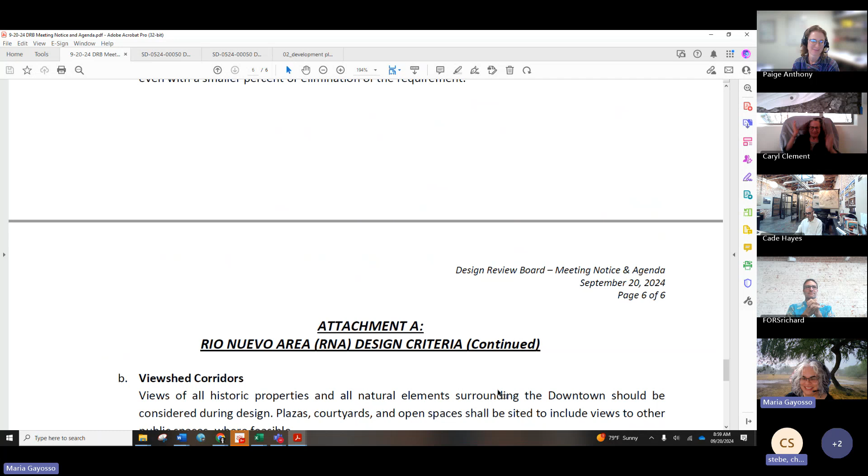Courtyard, so I think we hit that one too. Good job, yeah, you guys nailed that one. Well, at least I just got something that the linkages committee's 100% on. You lead off your press statement with that: we are 100% approval on this as a courtyard.

View shed corridors, that's a tough one. Well, I think their punch-out window is pretty cool, looking across the street to the historic Borderlands Brewery patio space, which is pretty cool. You definitely got linkages going on through downtown. Considering you're right on 7th, that's not in your control, but you are enhancing those streetscape areas, and we did shade.

I think we were all okay on the shade. Maria, I don't think we even need to make it a formal comment on our end, but you're going to ask that as part of your review to have that minor modification. Yeah, I'm going to be asking Richard to resubmit the design package with the revisions to the shade study.

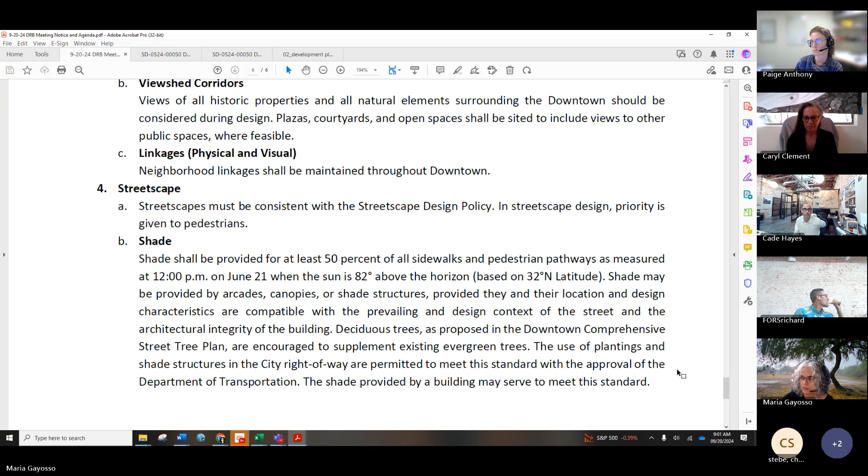Is this the end of our list? I think it is. It is. Shade's usually our grand finale, right? Oh, God. All right, new guy.

Okay, well, this is your hazing. So we have 2 conditions we want to add, right? I don't know, have you been on boards like this in the past? No. Okay, so typically the way the motion runs is we run the motion and say subject to the following conditions, and I would just add one.

That the shade study is modified to show 12 p.m. I think our other condition was providing exterior lighting to the pedestrian walk-up areas and at exit doors. And the third was to ensure that there's a 6-foot universally accessible route when all doors and openings are at their full extent.

Those are the 3 points, Chris. You got 3. Any other ones? That's what I got on my notes. Okay, cool. Other part is just being able to read it halfway decently. Okay, so I have to read this here. Yeah, you have to read it. We usually read it word for word, and then the conditions are okay.